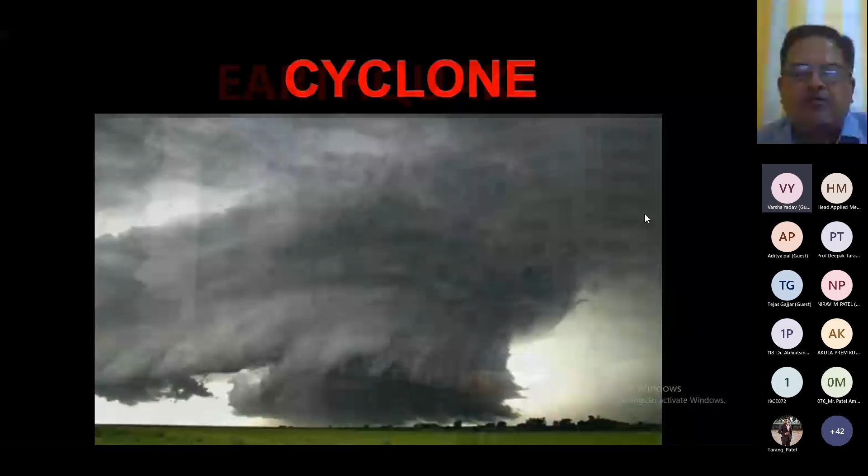And when we talk about these disasters, we are categorizing them into natural disasters or man-made disasters. Most of the time, we are saying that earthquake is a natural disaster. Cyclone, we say it's a natural disaster. When it comes to flood, we are saying that it is both ways. It is a natural disaster as well as a man-made disaster, because sometimes, because of the mistake of human beings, the area is flooded. For example, what happened in Surat was the classical case of man-made flood. Same way, Machhu Dam collapsed way back in 1979, and that was because of human error. So you can say it's a man-made disaster. So flood may be man-made, it may be natural. Same way, fire is also natural and man-made. Landslide, again, is natural and man-made.

For example, if a landslide triggers because of an earthquake, it is natural, but once you carry out mining operations in a hilly region, and if a landslide triggers because of the explosion you are doing in the hilly region, then it is a man-made landslide. Same way, you have liquefaction and the tsunami. The tsunami we generally categorize as a natural disaster.

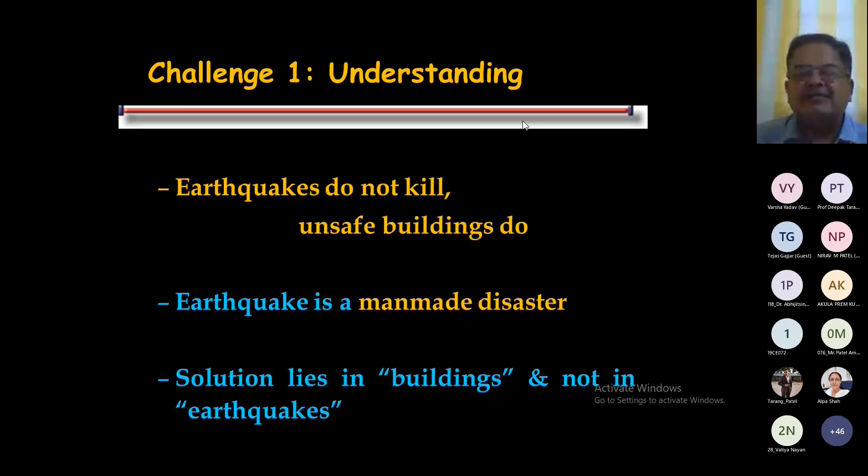So again, I'm saying earthquakes do not kill, unsafe buildings do, and therefore earthquake is considered to be a man-made disaster. Earthquake is a natural hazard, but the disaster is man-made. If you look at any particular disaster, you find two things. The loss of life: if 100 people die during disasters, out of that 47 die in earthquakes. So the highest contribution is coming from the earthquake.

Same way, if we lose 100 rupees, then out of this 35 rupees is the contribution of earthquake. The highest economic loss is also associated with the earthquake, right? So you have to be very cautious when you're dealing with earthquakes and structures. Right. So design of buildings for earthquake is a very challenging job.

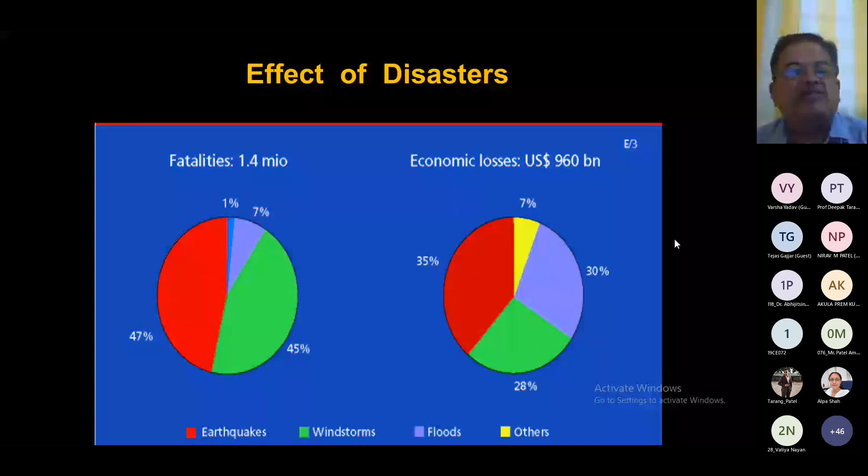And the Indo-Australian plate is going below the Eurasian plate, right? We know that on the northern boundary right now we observe the Himalaya there, but 10 crore years back there was a sea, and this sea was disappearing.

This Indo-Australian plate is moving below the Eurasian plate, so they are creating pressure on each other. When the stresses within the plate exceed the limit, the plate will break, and therefore the majority of earthquakes occur on this boundary of these two plates. If an earthquake takes place on the boundary, it is known as an interplate earthquake, and the earthquake which takes place within the plate is known as an intraplate earthquake.

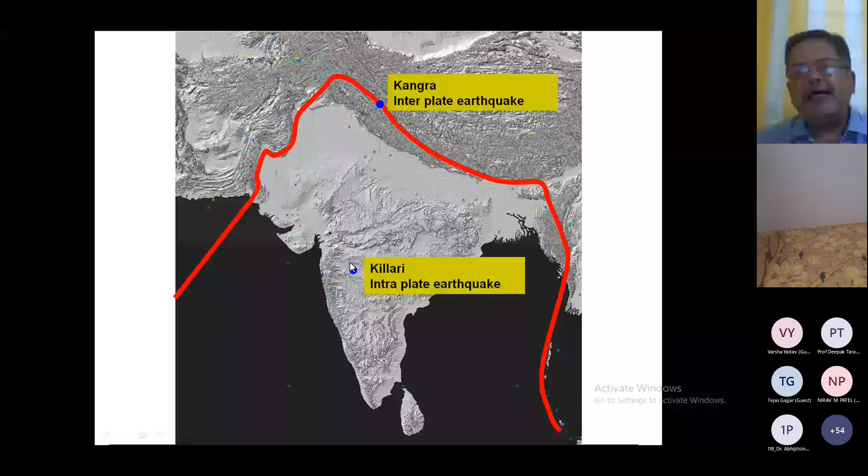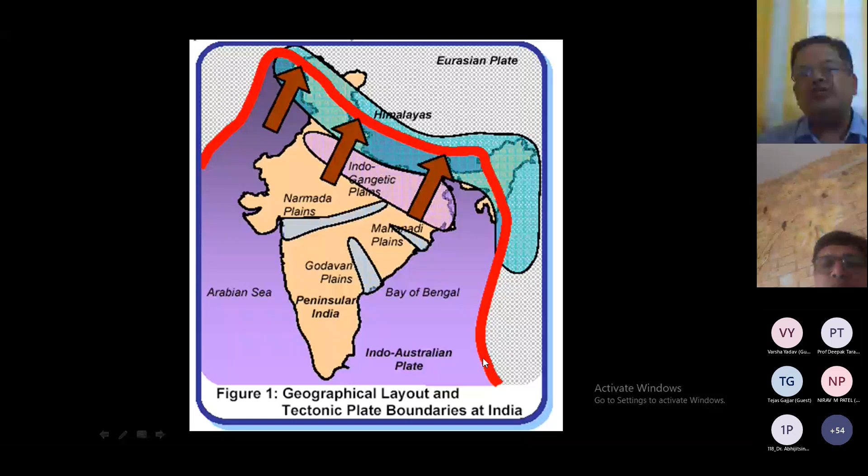Now if you look at this, we have seen this picture. This is the boundary of the Indo-Australian plate and Eurasian plate, where these two plates are interacting. The Indo-Australian plate is going below the Eurasian plate, and therefore you can see more than 95%, even 98%, of earthquakes are coming on this boundary, where these two plates are interacting.

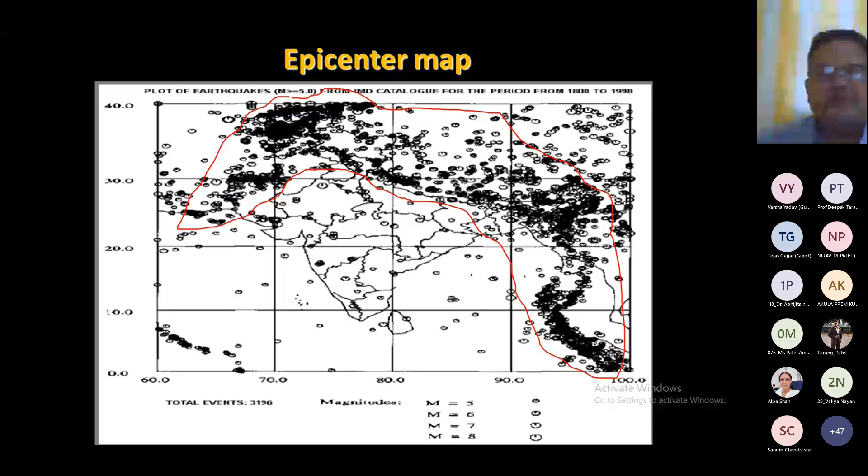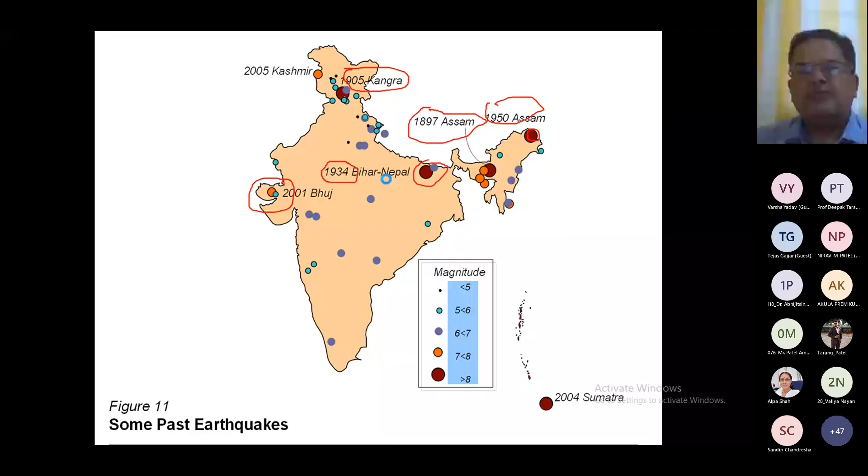And you see, this is the epicenter where the Bhuj earthquake took place. This is the place where the Bhuj earthquake took place.

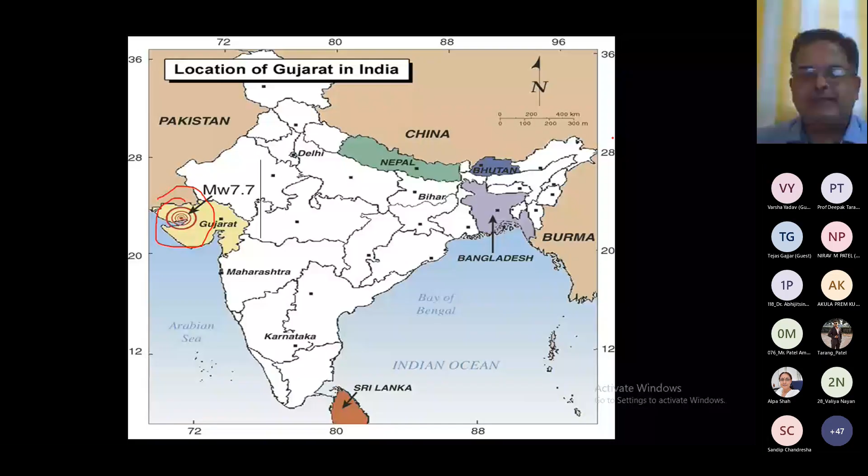Now, if you look at some past Indian earthquakes, and look at this particular list, then you find that the Kutch earthquake of 1819 had a magnitude of 8.3, and the number of deaths observed was 1500. In 1819 it was thinly populated, and even though 1500 deaths had been observed. If you look at the Assam earthquake of 1897, it is 8.7 magnitude, and 1500 deaths again observed.

If you look at the Coimbatore earthquake, 6 magnitude, but the most important thing is this number: no death had been observed during the Coimbatore earthquake. Coimbatore is in the south, it is an intraplate earthquake, and the magnitude was less, and the time of shaking was also very less.

The Kangra earthquake of 1905 had a magnitude of 8.6 and 19,000 deaths were observed. Just imagine, in 1905, Kangra is in Himachal Pradesh, and if such a big number of casualties happened during that time, it exhibits the severity of that particular earthquake.

We have the Bihar Nepal earthquake of 8.4 magnitude in 1934, with 11,000 deaths. Quetta is generally now in Pakistan, so we are not talking about it as India, but earlier in 1935 it was a part of India. That earthquake was 7.6 magnitude with 30,000 deaths, the highest reported death toll observed. And 1950 Assam, 8.7 again.

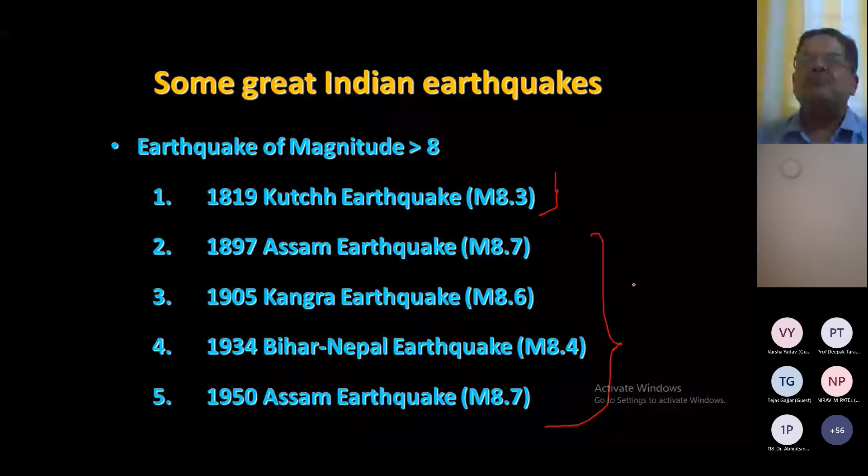Out of these, 4 earthquakes are interplate earthquakes, and one is only an intraplate earthquake. I'm talking about earthquakes that took place on the north or northeast boundary. If I'm talking about the interplate earthquakes, you will find 4 earthquakes from 1897 to 1950 - how many years is that? 53 years. India has observed 4 great earthquakes.

What is the return period? The return period is 13 years. So we can conclude that India has a probability of having big earthquakes at an interval of 13 years. You see, the whole field of earthquake engineering is based on probability.

You can see in the last 72 years, from 1950 to 2022, no great earthquake has taken place on the boundary of these 2 plates. But if India has a probability of having big earthquakes at a regular interval of 13 years in the past, then I can say that after 13 years we have a probability of having a big earthquake. If it doesn't come, then after 20 years the probability will increase.

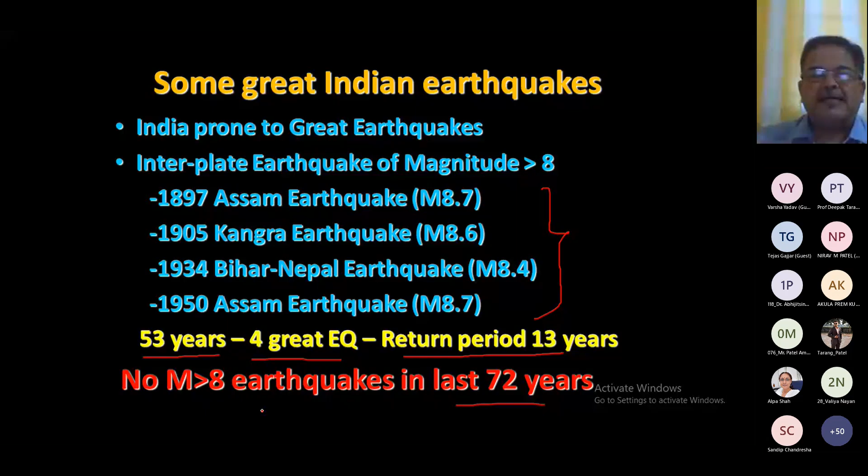Now you can see 72 years have already gone past, and we don't have a great earthquake on the boundary of these 2 plates. And therefore there is a theory of seismic gaps.

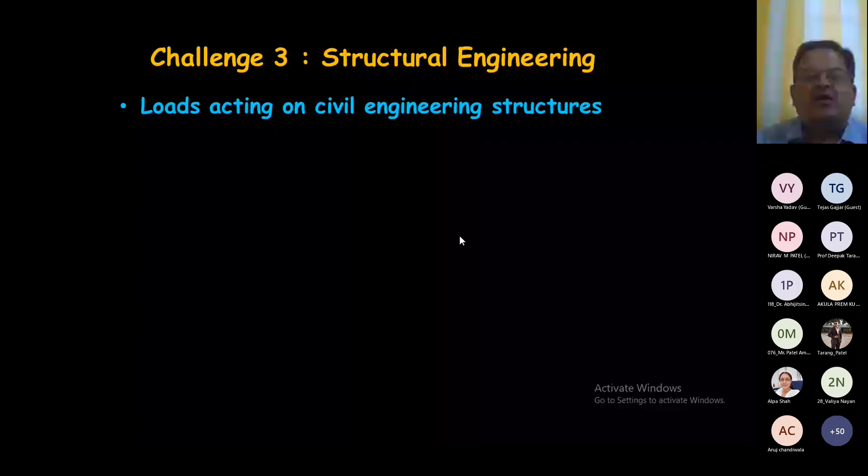When we talk about our structures, we are generally designing them for the loads acting on them. There are two types of loads: gravity loads, acting in the direction of gravity, which are dead load and live load, and loads acting in the lateral direction. I'm talking about the basic loads of concern for which we design our structures. So the dead load and live load, acting in the direction of gravity, are known as gravity loads.

Generally this load is acting on your structure, so we consider it a permanent load. If I'm designing my column for 100 kilonewton, I apply a factor of safety of 1.5 as a load factor, and design that column for 150 kilonewton. So the actual load coming on that column is 100, but we are designing for 150. It means...

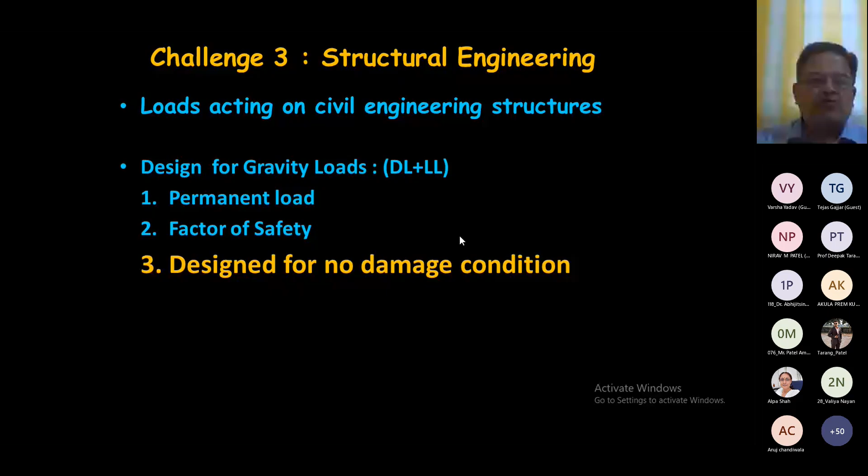Your structural element is not going to get damaged under any circumstances. So they are designed for a no-damage condition. This is very important. When you're designing your structure for gravity loads, it is designed for no damage condition. So this philosophy of designing elements for gravity loads does not allow any sort of damage because the factor of safety is involved.

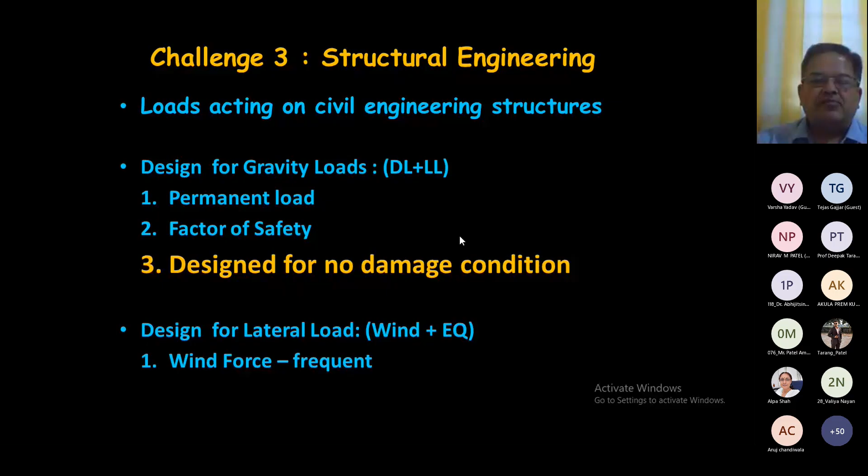When I talk about lateral loads, definitely wind and earthquake come to mind. Wind is quite frequent, and when we design our building for wind force, we apply a factor of safety, and we don't allow damage during the wind force. During a cyclone, we don't expect damage because we design our structure with a factor of safety. But when it comes to earthquake...

When it comes to earthquake, how we design is important. If you look at the earthquake event, understanding the philosophy for earthquake design is something different compared to the design philosophy for gravity loads. So we have to understand earthquake first.

Actually, what happens in an earthquake? The rock fractures, and because of this sudden fracture, energy is released, and this energy travels in the form of waves, which shake the foundation of the building. So some of this energy enters the building, and your building has to absorb this energy. If your building is able to absorb this energy, it remains safe. If it is not able to absorb the energy, the building will collapse.

If you look at how much time a structure is subjected to earthquake force, and look at the earthquake time history - acceleration versus time - the maximum effective time of earthquake shaking is 2 minutes. Within these 2 minutes, the earthquake checks all the buildings that come in its way. That is the power of nature. So within 2 minutes, the buildings will be checked to see whether they are designed properly or not.

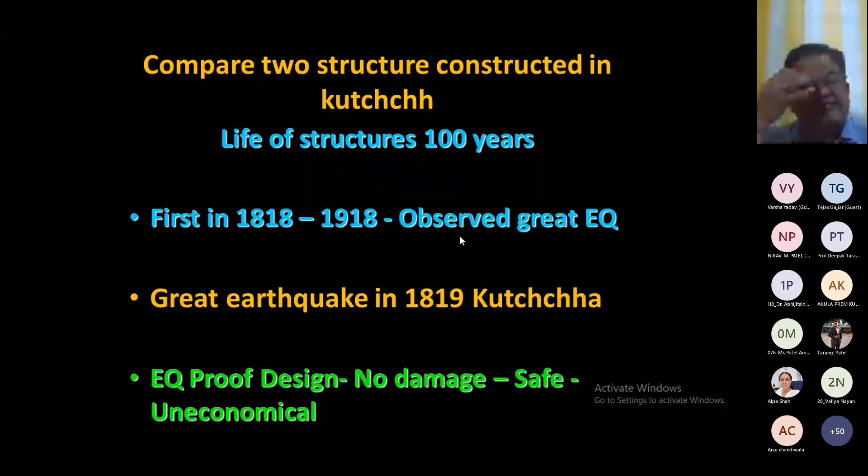The stresses must be within limit, right? Then you can say that your structure is fulfilling the requirement. So your structure should remain functional, and the stresses must remain within the limit. That is the requirement for a structure to be usable. So now I'm considering the first building, which is constructed in 1818. Now if I consider life is 100 years, it expires in 1918, right?

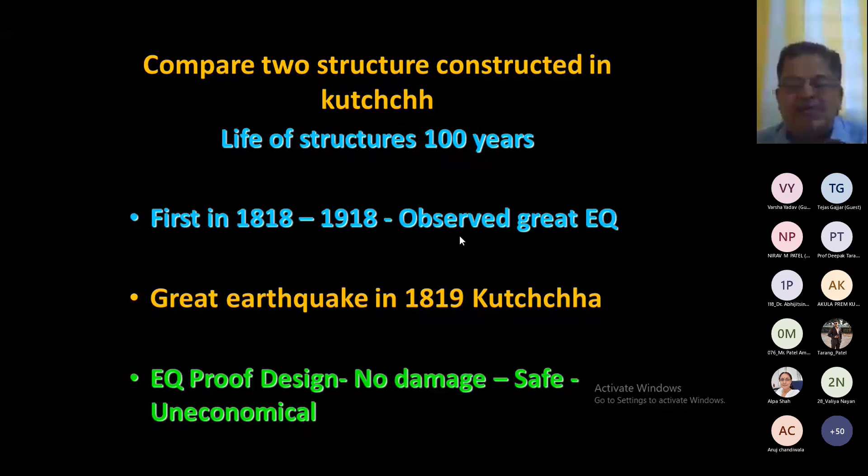Now we know that there was a great earthquake in 1819. So this building has observed a great earthquake in 1819. It was constructed in 1818, and in 1819 it observed a great earthquake. And if we learn from this building, then we understand that we have to go for earthquake proof design. We have to design in such a way that no damage should occur. So when we design the building as earthquake proof, it is always safe, but it is uneconomical, right?

Now I'm considering the second structure, which is constructed in 1820. This building will expire in 1920, right? If you look at the history of earthquakes in the Kutch region, we had a great earthquake in 1819, and then a major earthquake in 1956 in Anjar. So this building, from 1820 to 1920, has not observed any earthquake. One building has seen an earthquake after its construction. The other building has not seen any earthquake during its life.

So therefore we are saying the earthquake is not a sure event. Whether your building will see an earthquake during its life or not, it is not sure, right? And if we learn something from the second building, constructed in 1820, then this building is saying that there is no need to design for earthquake. Now you see, I told you that the whole of earthquake engineering is based on probability.

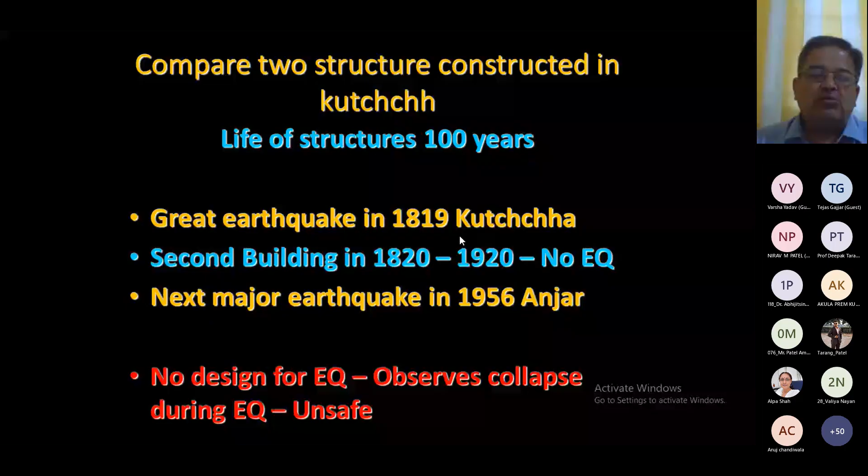Suppose the earthquake came not in 1819 but in 1850, then it might have observed collapse, right? So the building becomes unsafe. And for unsafe buildings there is no space in the field of construction. We cannot design unsafe buildings. So the first building is saying design the building as earthquake proof, and this building is saying there is no need to design the building. So two extremities, right? And therefore we can conclude that an earthquake event is not a sure event.

And therefore we are going for another approach, which is known as earthquake resistant design. Now what is earthquake resistant design? In earthquake resistant design, we are allowing the damage, but we are not allowing collapse. When I allow damage in my structure but not any sort of collapse, it is safe. Your building is not going to collapse during the earthquake. And at the same time, it is also economical, because I am designing my building for a lower level of force.

So instead of going for earthquake proof design or the no design concept, we are going for the earthquake resistant design concept. And this is the only philosophy in which damage is expected. Now I will make you understand what exactly we are doing in earthquake proof design. So here you look, this is point B.

This is the maximum force coming on your structure, right? And when I'm designing my structure for this maximum force, and this is the force versus deformation curve, it remains linear, which means it remains elastic.

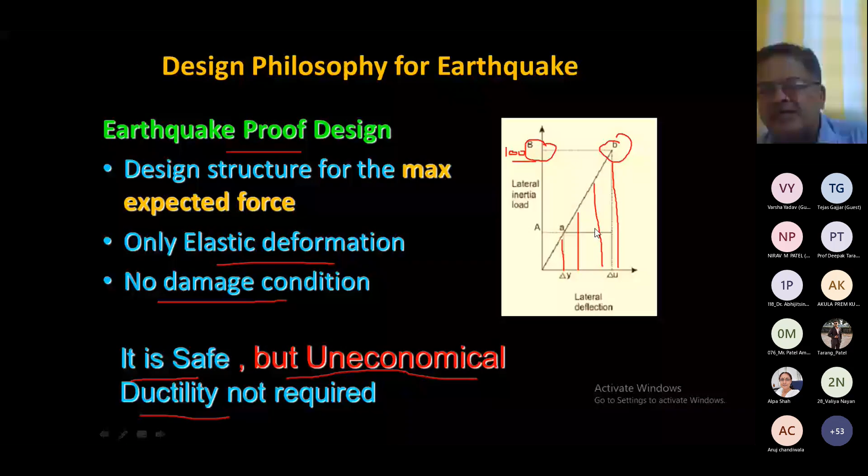In the previous case, this is a triangular portion, and this is the amount of energy absorbed by the structure. The same amount of energy is absorbed here, but here we are allowing our structure to enter into the inelastic region.

Now this is the particular point. From this point onwards, this is inelastic deformation. And what is the meaning of it? If your structure is entering into inelastic deformation, it means permanent deformation. If it is permanent deformation, there is damage. So from this point onwards, damage starts.

It means we are allowing the damage in our structure, right? We are allowing damage in the structure. And here comes the ductility part, right? Ductility part. What is the ductility? The ductility means capacity to undergo large inelastic deformation after yielding without losing strength and stiffness, right?

So here, this is basically the ductility we are talking about, right? We are saying that your structure should be ductile, right? It should be ductile, and this is the ductility we are talking about. And for this we have an IS code, IS 13920, right? So here we are allowing this inelastic deformation.

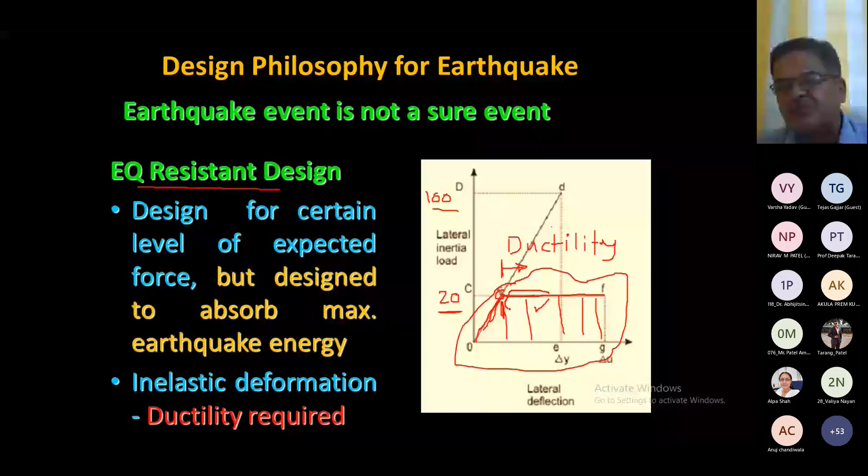Remember this inelastic deformation. So in this earthquake resistant design, we are allowing the damage. Right? So here the damage is allowed. This particular portion damage is allowed, right? But no collapse. Remember, no collapse. So it is safe, because no collapse is observed, and it is economical because instead of 100 you are designing for 20. So your structure elements are very small as compared to 100, right? So here you are designing for only 20% force.

But the only risk in earthquake resistant design is if earthquake comes, then you have to be ready for the retrofitting. So in case of a major earthquake, your building will absorb damage, and there is a possibility that retrofitting is needed after the earthquake, right? So therefore, I'm always saying that earthquake design is not a strength-based design. We are not designing for 100% strength. We are designing for 20% strength.

But the earthquake resistant design is basically based on energy absorption concept. Energy absorption, right? How much energy is absorbed by your structure? Because earthquake releases the energy, and your structure has to absorb the energy, right? Here we are allowing the damage. Remember, we are allowing the damage. We are making our structure ductile, and when we make our structure ductile, then it will absorb a lot of energy.

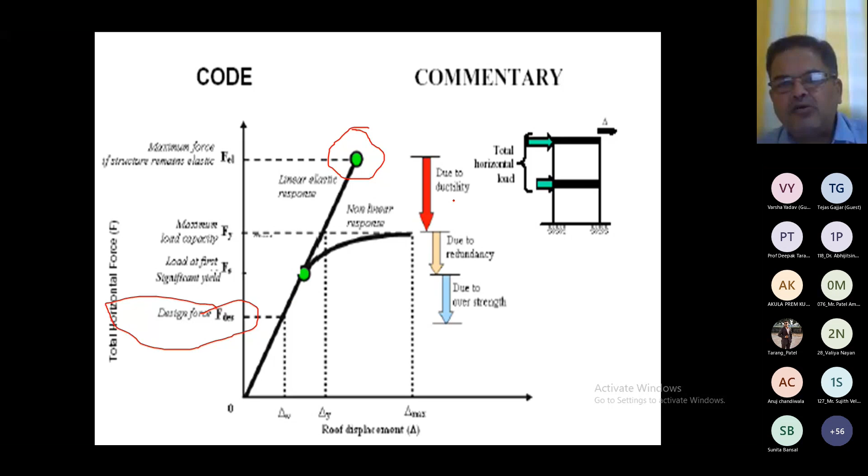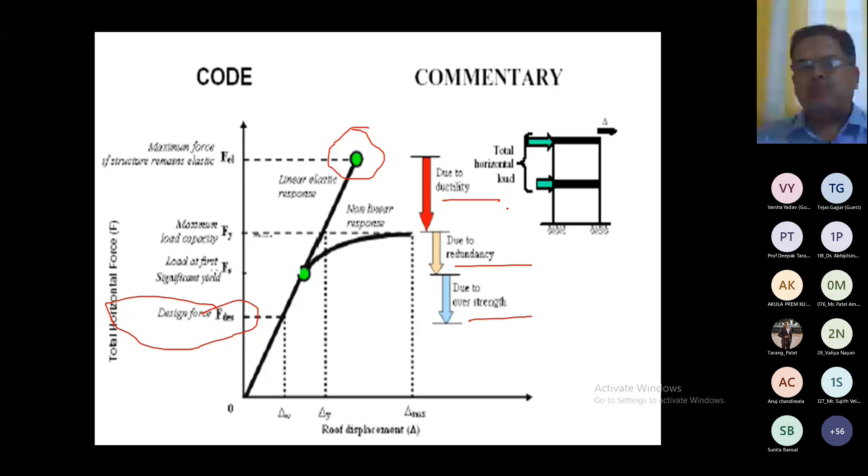Now here, this is very important. Remember this curve. So this is the maximum load which is coming on your structure because of the earthquake, and you are designing here only for this much force, right? So here, this is the design force, and you see how you are reducing. Why are you reducing this maximum load to this design load? This is because of the ductility. This is because of the redundancy and the overstrength. These are the three factors on which we are depending, and we are reducing this load from maximum load to the design load, right?

So here you can see we are designing in such a way that your structure should behave in a ductile way, and it will absorb a lot of energy. Again, I'm saying during earthquake you have to design your structure in such a way that it should absorb maximum energy, because during earthquake energy will release, and this energy is actually entering into our building, and our building has to absorb the energy to make our structure safe. So up to this particular point your behavior is elastic, and then onwards you have inelastic behavior. So that is where ductility will come in picture, right?

So if you look at this, then you find that this blue curve will tell you a ductile performance, and the brittle performance means this building collapses because it is not able to absorb the earthquake energy, right? So you have to design your building in such a way that this should not happen. Don't make your structure brittle. You have to make your structure ductile, right? That is what is required.

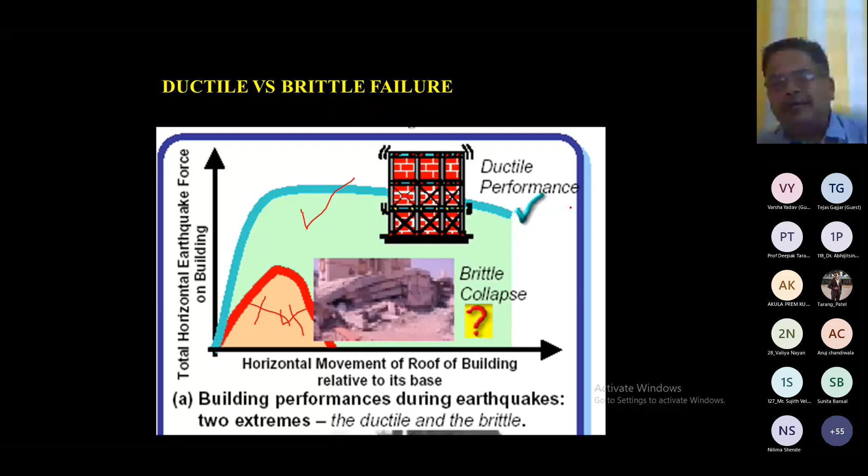So the philosophy of earthquake resistant design, I'm not going in depth as far as this philosophy is concerned, but I'm saying that damage is allowed. This is the only philosophy in which damage is allowed, but collapse is not allowed, right? Damage is allowed. So we are allowing damage. When the major earthquake comes, our structural elements will absorb the damage, and after the earthquake, we have to retrofit our structural elements and make our structure functional, right?

So again, if we compare this to earthquake proof design: earthquake proof design means we are designing our structure for the maximum expected force, and your structure should remain elastic throughout the earthquake, and if it remains elastic, then there is no damage. So it is safe, but it is uneconomical. Here ductility is not required, but you are designing for a very high level of force, and you are making your structure uneconomical, and we are not sure whether your building is going to see an earthquake or not.

In earthquake resistant design, we design for a certain level of expected force, right? And we rely on inelastic deformation where damage is allowed, right? So when you are designing for 20% force, definitely your structural element will be very small as compared to the 100 kilonewton force, right? So it is economical, and it is also safe because we are not allowing any sort of collapse.

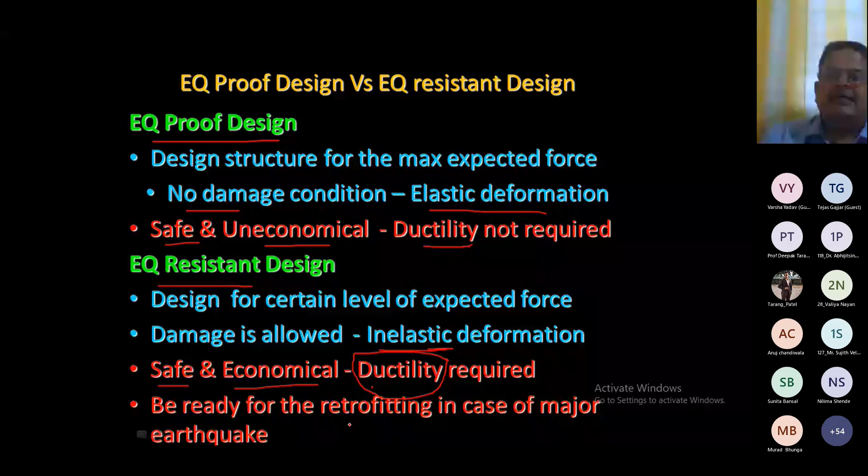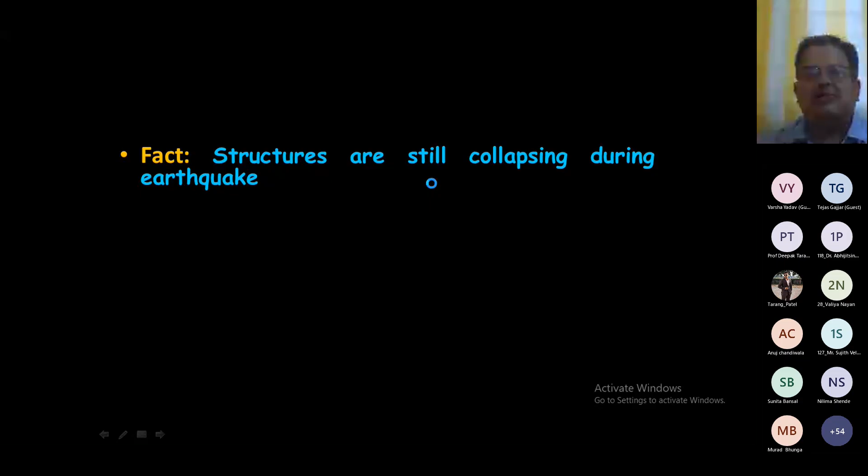Now our philosophy is saying that collapse is not allowed, right? But what is the reality? What is the fact? The fact is structures are still collapsing during earthquakes, right? If you look at the 1994 Northridge earthquake, 1995 Kobe, 1999 Turkey earthquake, or 2001 Bhuj earthquake, we have seen devastation during these earthquakes.

You see, Japan is considered to be the best as far as earthquake preparedness is concerned. And even so, in the 1995 Kobe earthquake, a number of bridges failed in Japan, right? And it exposed the wrong practice of earthquake resistant design. So even though Japan is very proactive, because Japan is sitting on the ring of fire and has observed earthquakes at regular intervals, if this is happening with Japan, then this is really alarming.

If you look at America also, in America a few buildings collapsed, not like India or Turkey; few buildings collapsed as compared to developing countries like Turkey and India, right? But structural failure had been observed during the strong motion, right? And what is happening? I told you, the loss of life.

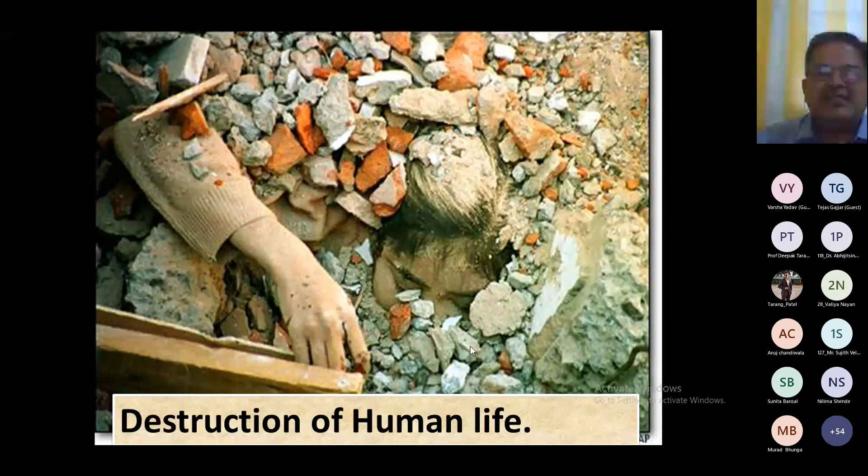Now, this kind of picture we always observe during an earthquake. If you see such pictures, then these pictures will disturb you as a civil engineer. We are not ready to accept this, right? It always questions us, who is responsible for this, right? This is the picture from the 2001 Bhuj earthquake. I want to share my experience of the 2001 Bhuj earthquake.

You see, I was working as an NCC officer, and we actually work with the Indian Armed Forces. The Indian Armed Forces was given the responsibility of rescue and relief operation after the 2001 Bhuj earthquake. So what they did, they cordoned each and every collapse site, and they were bringing the dead bodies and valuables out of that debris.

Right? And our NCC cadets were working with them, and we worked for almost 6 months, and we learned a lot. Our NCC cadets brought the dead bodies out of the collapse sites. I was also involved in bringing out the dead body of a 4-year-old boy. When we are bringing it out, it always raises the question in your mind as a civil engineer, who is responsible for this.

I want to say that after bringing that dead body of a 4-year-old boy, I was not able to sleep for a month. I tell you, right? And it always questions us: who is responsible for this, right? As civil engineers, we are not expecting this. If such a thing is happening, it means someone has committed a mistake, right? And who has committed the mistake, it is very difficult to find out, right?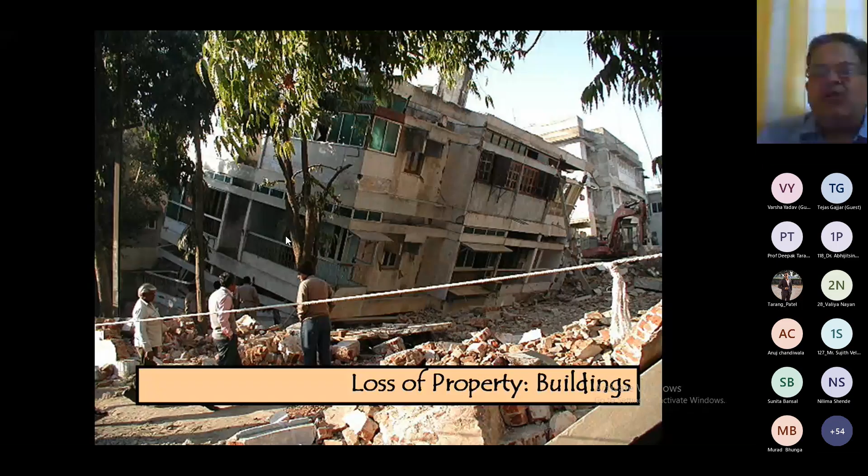So you see, as civil engineers, someone is responsible who committed a mistake, and because of that, the structure collapsed. So as civil engineers, we don't want to see such kinds of pictures. Because of this, Anjar, Bachau, Rapar, these villages or towns came to debris during the 2001 Bhuj earthquake. If you look at this, the building collapsed, right? This is a typical soft story failure. So this is actually loss of property, and maybe loss of life is also involved in such a collapse.

If you look at this, the column is almost gone. Now this column doesn't have any capacity, right? So now you have to retrofit this column. Now the most important part is that, if you look at this damage, definitely this column is not able to take any more load. And even though this structure is standing, it means the load of this column is taken by the neighboring columns, right? But after this you have to retrofit it, and again you have to make your structure functional again.

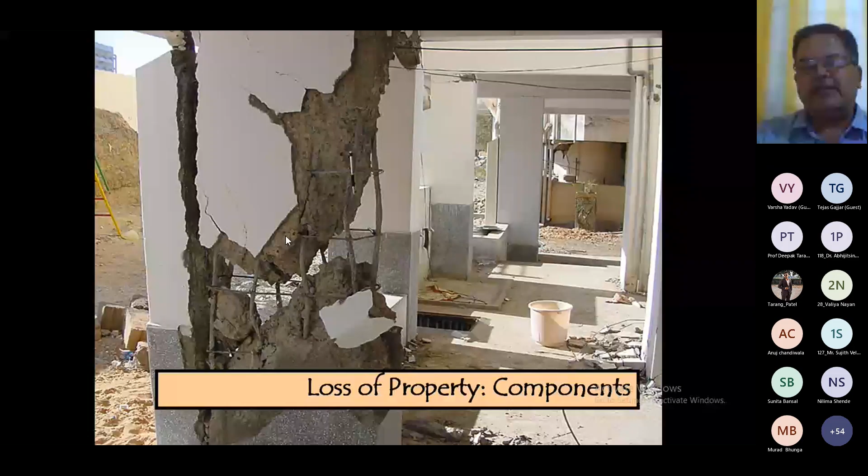If you look at the schools, 12,000 schools were either damaged or collapsed. They were made up of prefabricated elements. The joint detailing was very poor. The heritage buildings actually suffered a lot, and we know that we are not able to restore these heritage buildings, right? Because we don't have the skilled manpower. So once heritage is lost, it is lost forever because of the unavailability of skilled manpower.

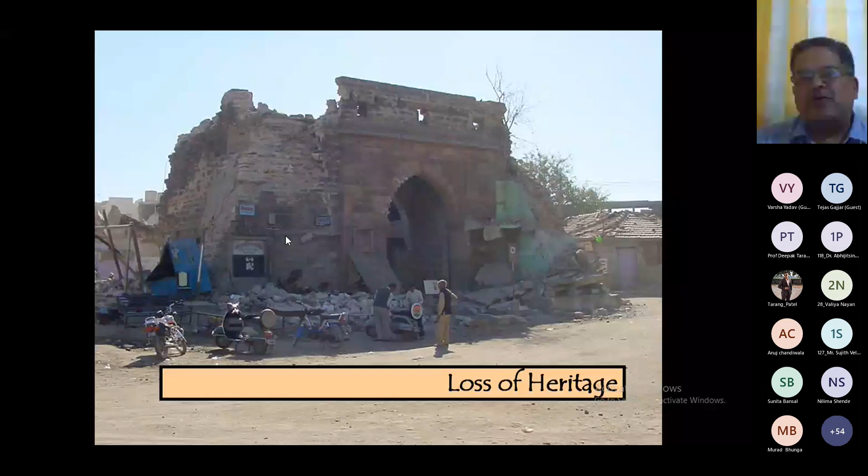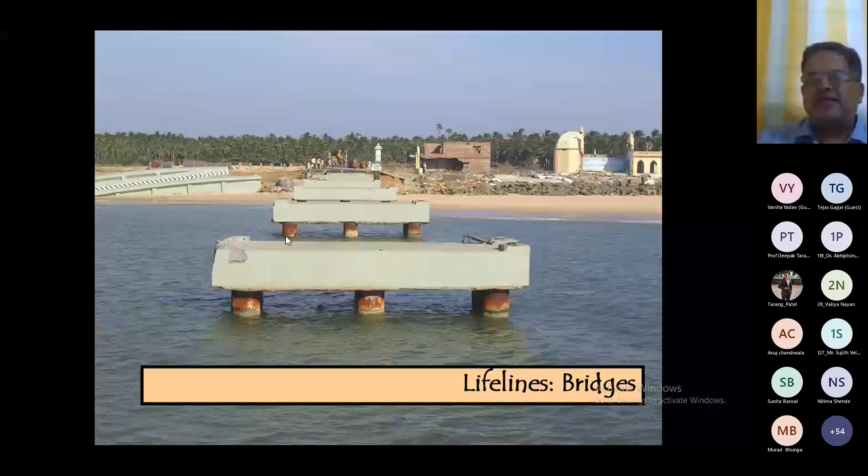This, you can see, is the Mani Mandir in Morbi. It was damaged, and after 12 years it was partially retrofitted, and people started using it again, but not 100% of the portion is utilized. This is the fort of Bhuj, damaged, and again, I'm saying it's difficult. Lifeline structures are affected a lot. The bridges were affected a lot. The road network was affected. So under these circumstances, we are not able to carry out rescue and relief operations. It is affected a lot.

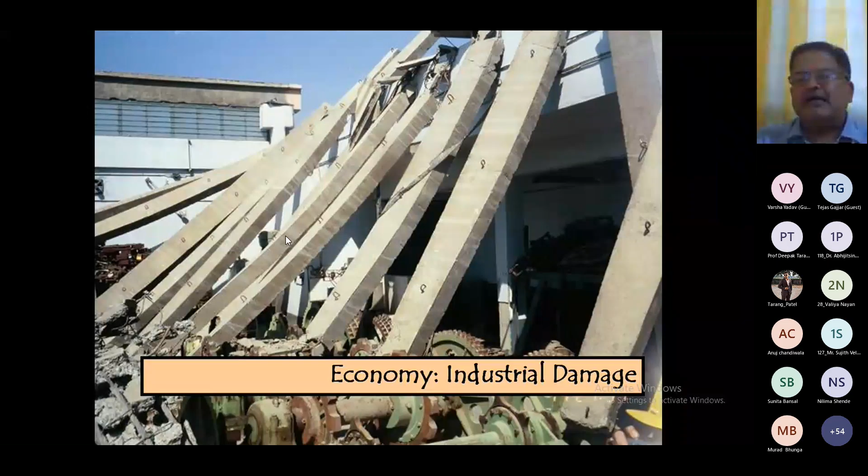The electric power was affected. Harbor structures suffered great damage during the 2001 Bhuj earthquake, and the industrial structures constructed with RC elements suffered damage. The industrial structures constructed with steel were not affected because they are very lightweight structures, but the RCC structures were affected a lot because they have larger spans and they are very massive. And the economic loss is very difficult to estimate, right? In the 2001 Bhuj earthquake, we lost almost 25,000 crore. If you consider it today, maybe it is more than 4 lakh crores or 5 lakh crores. So the economic loss is very difficult to estimate, right?

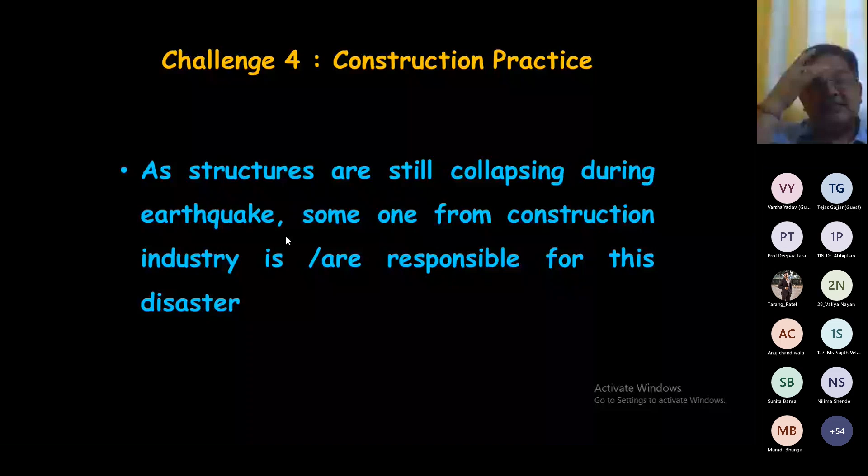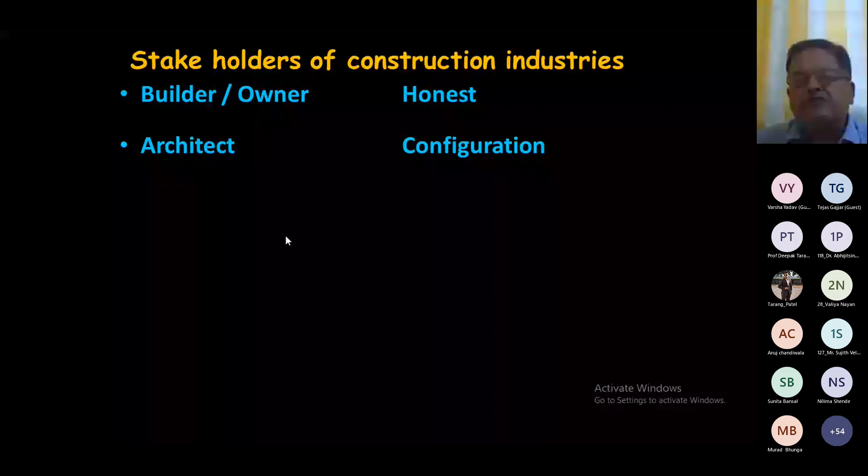So challenge number 4 is the construction practice. As the structures are still collapsing during earthquakes, someone from the construction industry is responsible for this disaster. And who are the stakeholders of the construction industry? We know the builder and owner, right? Who is conceiving the project? He must be honest. If he's not honest, then definitely we are adding unsafe structures. The architect has to give a good configuration. The structural engineer has to impart structural safety. The site engineer has to look at the quality of construction, right? The mason and carpenter have to look at the quality of construction.

The authority has to enforce the law. If we enforce the law properly, all the stakeholders of the construction industry will follow that, and definitely we have much better structures in society. Teachers and students are part of capacity building; right now this training is organized, and basically we are building capacity in the area of earthquake engineering. So these are the various stakeholders, and what attributes we want from this is marked against them.

Challenge number 5 is the error in safe construction. Generally we are committing 3 types of mistakes during construction: error of intention, error of concept, and error of execution.

What does error of intention mean? It means I know what is the wrong practice, and I don't want to go for the correct practice. I follow the wrong practice even though I know the correct practice. So that is considered under the error of intention.

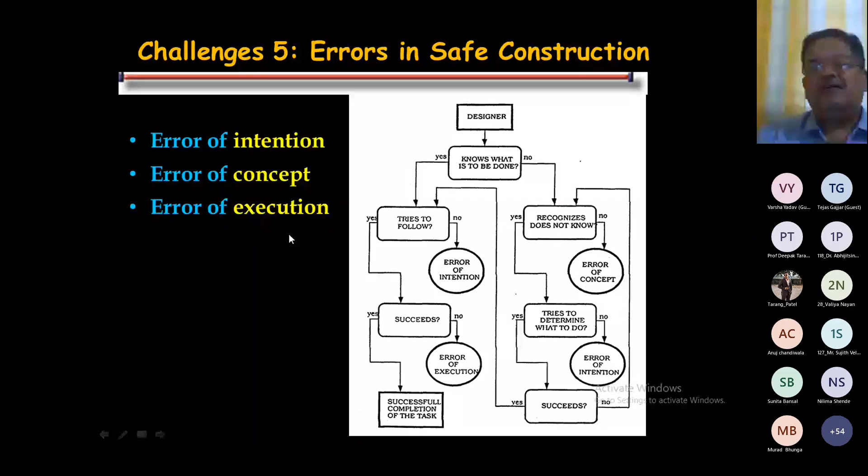Now the next challenge is change in attitude. What is the change in attitude? It's a mode of denial. Let's take the case of the 2001 Bhuj earthquake. This earthquake had magnitude 7.7. 13,805 people died, as per the official record of the government. Now if you imagine Ahmedabad, it is located almost 250 kilometers away from the epicenter.

130 multi-story buildings collapsed; most were ground plus 4-story, and two buildings were ground plus 10-story, Mansi and Sikhar. Almost 805 people were killed in 70 buildings. Out of these 130 buildings that collapsed, in 70 buildings 805 people died.

Now if you look at these buildings, you find they were very new, life less than 10 years, almost 10 years. They were designed by the architect and engineer, built by the developers. And if you look at the buildings of old Ahmedabad, like the old construction called pole, we have not seen the collapse of those old buildings.

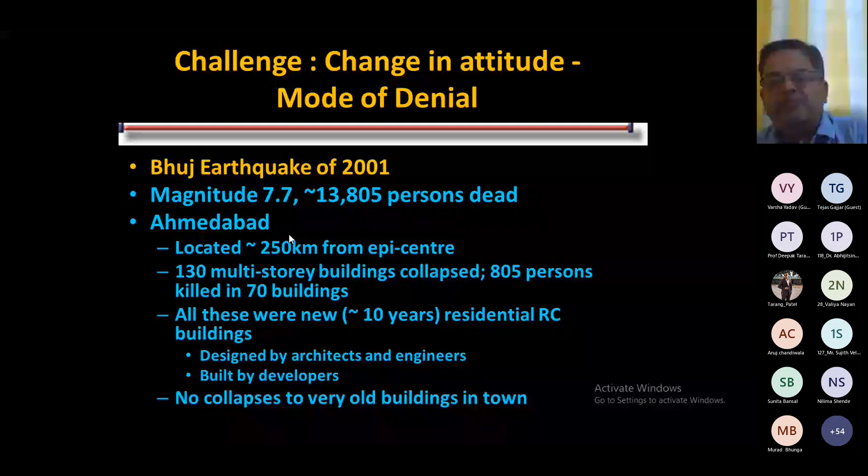Now this is the collapse of Mansi building, a ground plus 10-story building in Ahmedabad which collapsed. There are two buildings, Mansi and Sikhar, 10-story and 11-story buildings, which collapsed during the earthquake.

What was the argument of the structural engineer and builder? They are saying that this earthquake was very unusual, and that the intensity felt at Ahmedabad was more than expected.

Fortunately, we have a broadband seismometer in the passport office in Ahmedabad, and we have a record of the earthquake from it. Ahmedabad is in zone 3, and as per the Indian code, the intensity expected is 7. The maximum intensity observed during the Bhuj earthquake was 7.

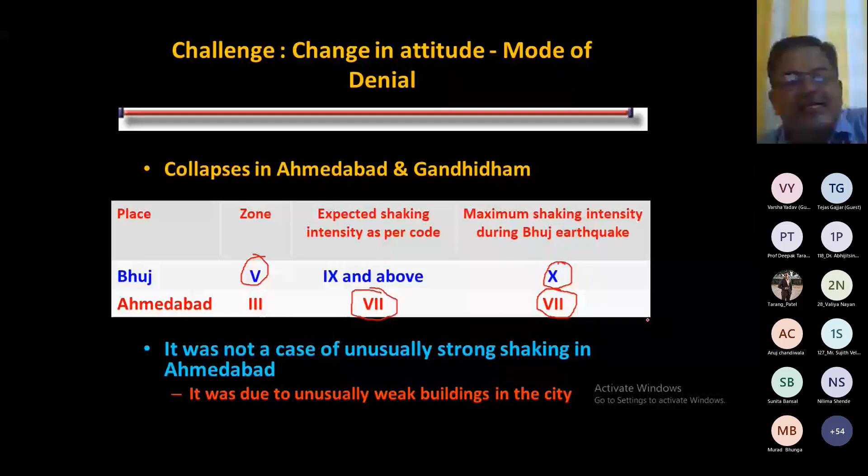So it was not an unusual strong shaking, right? Bhuj is in zone 5, so we are expecting intensity more than 9, and the intensity in Bhuj was 10. So again, it is within the limit as per the code. So we are in a mode of denial, right?

But what are the reasons why this happened in Ahmedabad? It is because of the total disregard to the structural system. The structural systems were not proper. Even if you talk about the lift, generally the lift well is constructed with RCC, but in many of these buildings we have seen the lift well constructed with masonry. I think this is a very poor practice.

The structural system is very irregular. We have a soft story, with parking at the ground story, and then we start living on the upper stories. So the ground floor becomes very soft, and almost 90% of buildings in Ahmedabad which collapsed, it is because of the soft story. We have not followed the structural design principles. The quality of construction was very poor.

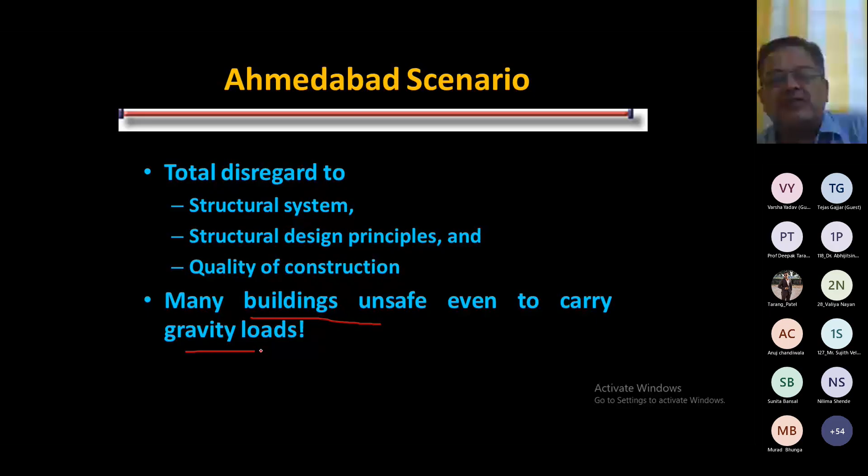There was a building in Junagadh, a 10-story building, and this building collapsed not during the earthquake - normally it collapsed under the gravity load. So you see, this type of poor quality of construction leads to big disaster.

Now the question is about developed country versus developing country. In the 2001 Bhuj earthquake, 13,805 people died. A similar earthquake took place in California, and how many deaths were observed there? Only 50 deaths in California. America is a developed country with very strict and stringent bylaws for earthquake safety, and they strictly follow that. So enforcement by the authority is really wonderful in America, but still buildings are collapsing there.

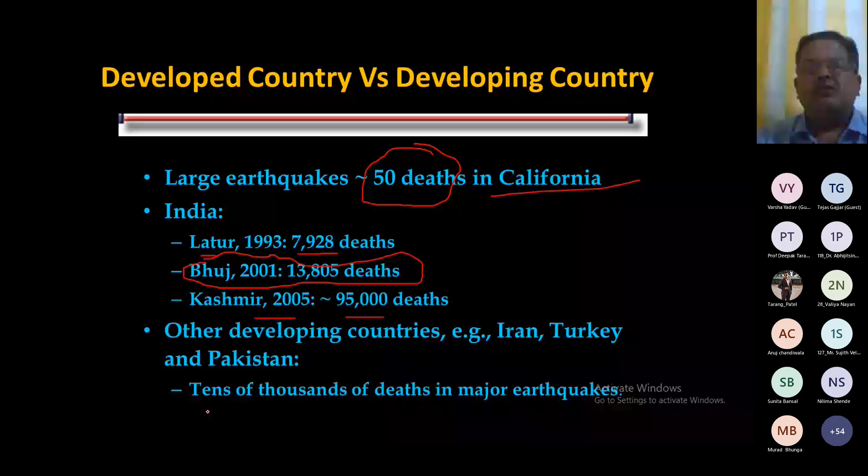If you look at India, in Latur 1993, almost 8,000 deaths were observed. In Kashmir 2005, 95,000 deaths were observed. If you talk about Iran, Turkey, or Pakistan, if an earthquake takes place, thousands of people will die. In terms of economic loss, I told you 25,000 crore, about 5 billion US dollars was the loss. If a similar earthquake to Bhuj took place in the north or northeast border, it would be even more expensive.

Now, another challenge is we are not learning from past earthquakes. We are not learning from the past earthquake. I'm just discussing a few examples of it.

If you look at the Bihar-Nepal earthquake of 1934, the magnitude was 8.4, intensity was 10 on the modified Mercalli scale, and almost more than 10,000 deaths were observed - 11,000 deaths were observed. Now, the question will arise:

was there no such big earthquake in this particular region before? The answer is no - there was a big earthquake in 1833 also, and we haven't learned from this. After almost 100 years, another big earthquake hit Bihar, Nepal, and we have seen such casualties. So we are not learning from the past earthquake. That is the problem, right? That is the problem.

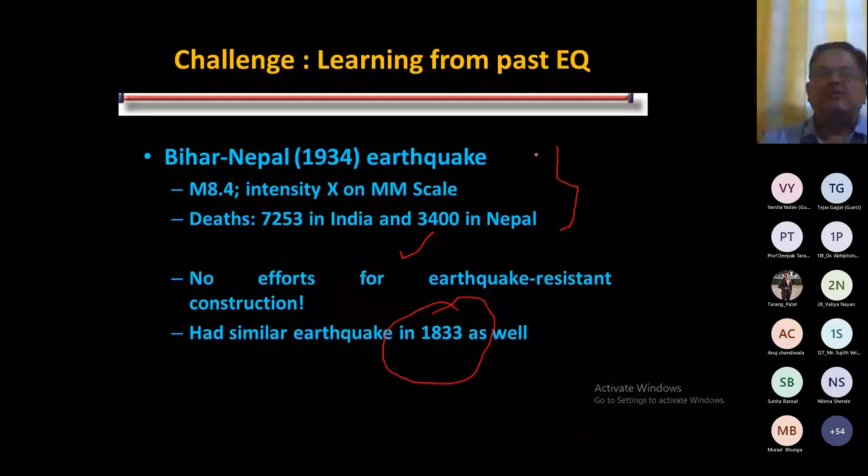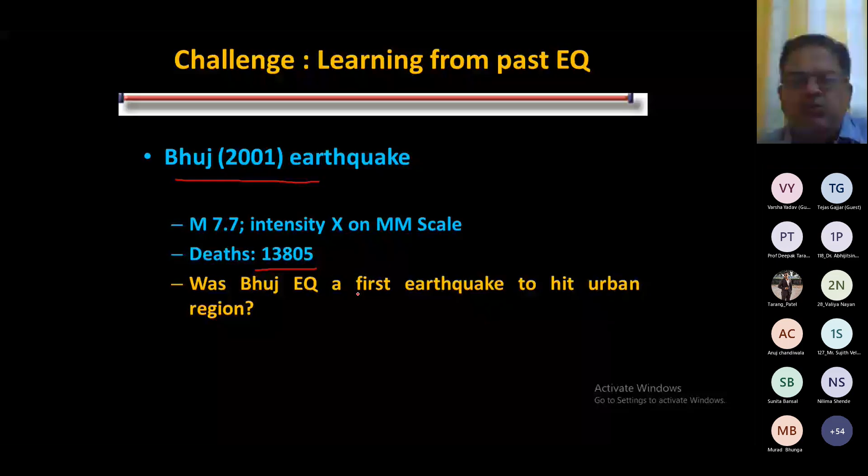Now look at the second example I'm giving you. The Bhuj earthquake, 2001, magnitude 7.7, intensity 10 on the Mercalli scale, with 13,805 deaths observed. Now the question is, was Bhuj the first earthquake to hit an urban region? No, we had an earthquake in 1997 in Jabalpur, which is a city like Ahmedabad, and the urban area was affected there too.

We have seen similar types of failures in the Jabalpur earthquake, but we have not learned from it. Why? The reason is the magnitude of that earthquake was only 6, and the number of deaths was only 38. In a country of 135 crores, only 38 people died, so we did not take it seriously. If we had learned something from the Jabalpur earthquake, we might have saved Ahmedabad, but we haven't learned from it.

Now we've been talking very negatively, you feel that, right? But there are some positive stories, success stories from India. We have seen them, but it was a long time back: 1930 in Balochistan, 1897 in Assam, and 19th century in Srinagar, Kashmir. These are the three main examples from where we can learn something.

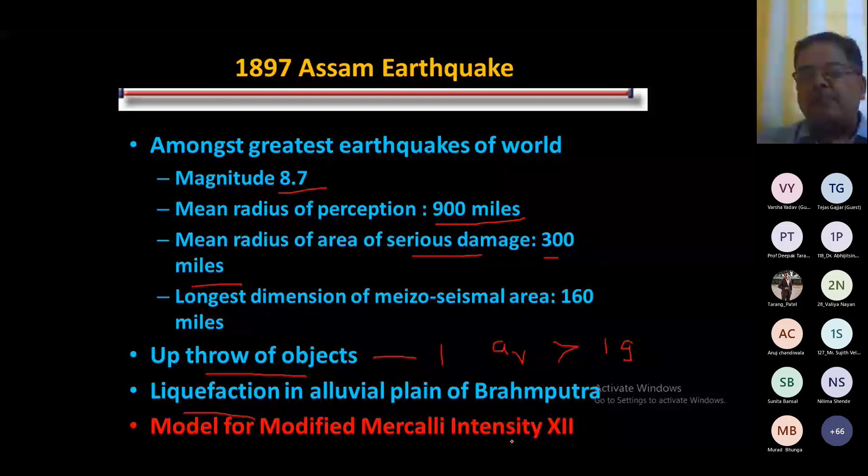Up to 1897, there were only 10 scales as far as the Mercalli scale of intensity was concerned. But after the Assam earthquake, two more scales were introduced, and now we have the modified Mercalli scale up to 12. That came after the Assam earthquake.

And after the great earthquake of 1897, the Ikra type of housing or construction developed in Sikkim. What they did was construct houses with stone and bricks up to the plinth level, and after that introduce wooden elements. This wood is very ductile in nature and also lightweight as far as mass is concerned. So this Ikra type of housing came into the picture in Sikkim after the 1897 earthquake.

But currently, again I'm saying, these houses are being replaced by poorly constructed RC and masonry buildings. If a big earthquake comes in Assam again, we'll see large casualties there.

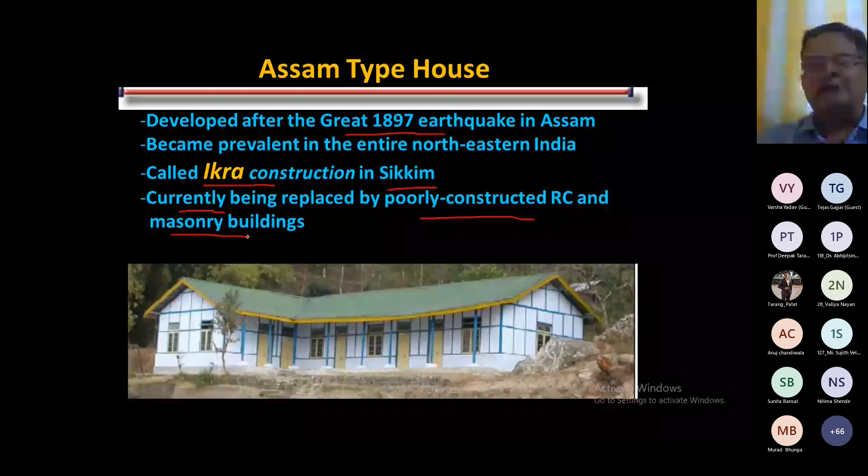The best example of a success story in India came from Balochistan. In March 1931, there was an earthquake with a magnitude of 7.4 in Balochistan. An intensity of 8 was observed, and 100 people died.

Now, this earthquake has raised a concern for safe houses for the railway officers, right? So SL Kumar, he is a very young engineer. His age was 28 years, and he was given the responsibility to design houses for the railways, and he has done a lot of work to make these railway quarters earthquake resistant.

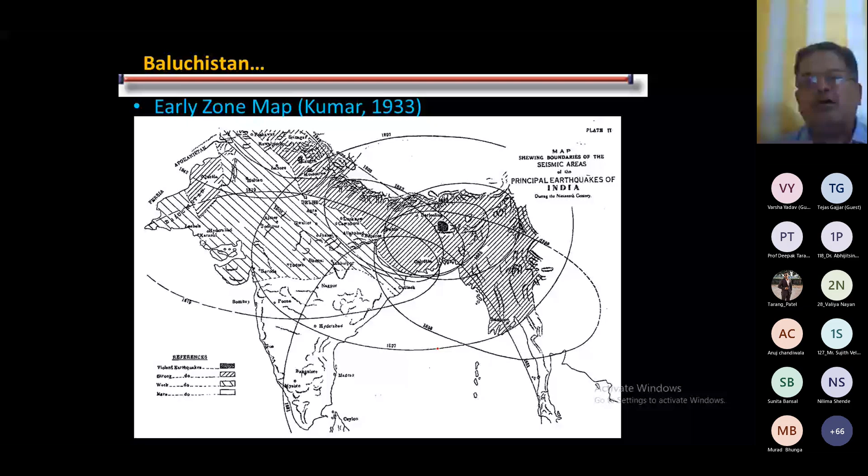Right. So in 1933, Kumar presented a paper, and he gave a concept of earthquake resistant construction, details of his design and cost implication. He gave the first ever seismic zone map of India, and he gave a seismic coefficient for two types of building, right? And this is the seismic zone map given by SL Kumar, right?

So again, I'm saying there was an earthquake in 1931. It was 7.4, and 100 people died. And after that, SL Kumar was given the responsibility to construct the railway quarters. And there was an earthquake in 1935, in Quetta. The magnitude was 7.6. Intensity observed was 10, maximum intensity. 30,000 people died, 40% of the population. Remember, 30,000 people died during the Quetta earthquake. But the railway quarters designed by SL Kumar performed excellently, right?

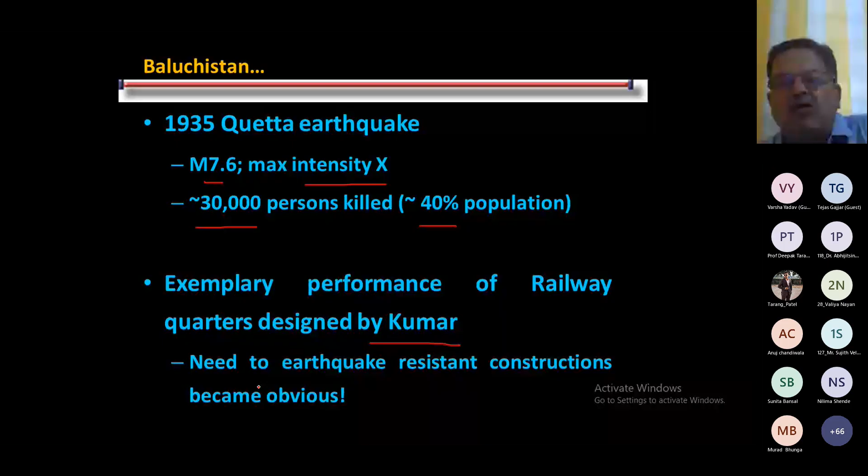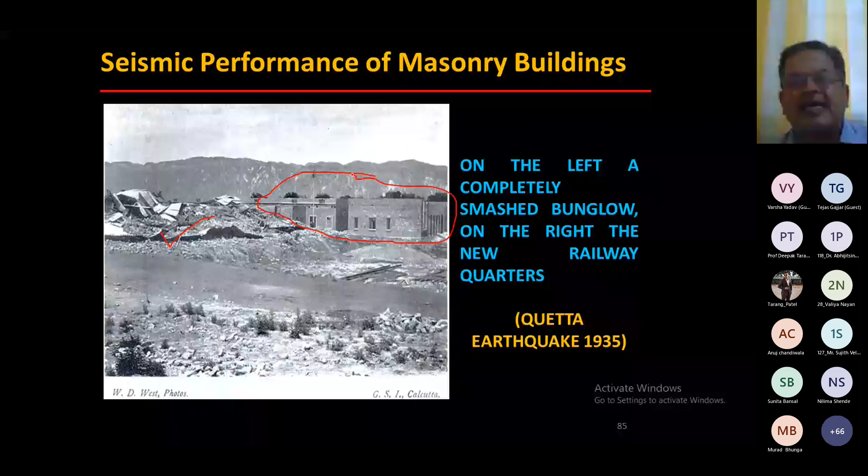And you see, SL Kumar had not learned earthquake engineering. He designed everything by understanding the structural behavior. First, look at this picture. This is the picture from Quetta. These buildings collapsed, but these buildings are absolutely safe, right? Designed by the engineer SL Kumar, right?

Now, what he has done, he has introduced reinforcement in the masonry, right? He knew that masonry is a brittle material, right? The failure of masonry structures is very brittle, and when lateral force is acting, these masonry structures are very vulnerable. So to take the tension, he introduced the reinforcement, and he created a bond. Like we have English bond and Flemish bond, he introduced a new type of bond in which he can introduce the reinforcement, and it is known as the Quetta bond.

You see, SL Kumar had not learned any earthquake engineering, but he designed this building on his knowledge only, right? And these structures performed excellently well during the earthquake of 1935, right? So it gives us the idea that if you do anything honestly and for the society, you can do wonders, right?

So we know that some fantastic work was done from 1897 to 1935, right? New typologies of buildings were introduced: the Quetta bond, Assam type housing, the Dhajji Dewari. But after 1935, there were many earthquakes, but we have not done anything. If you look right now, we are more vulnerable than 50 years ago, right? And another important thing is the developments in 1897 and 1935 were led by professionals, not by academicians, right? Academics should lead this. Instead, the professionals were leading at that particular moment.

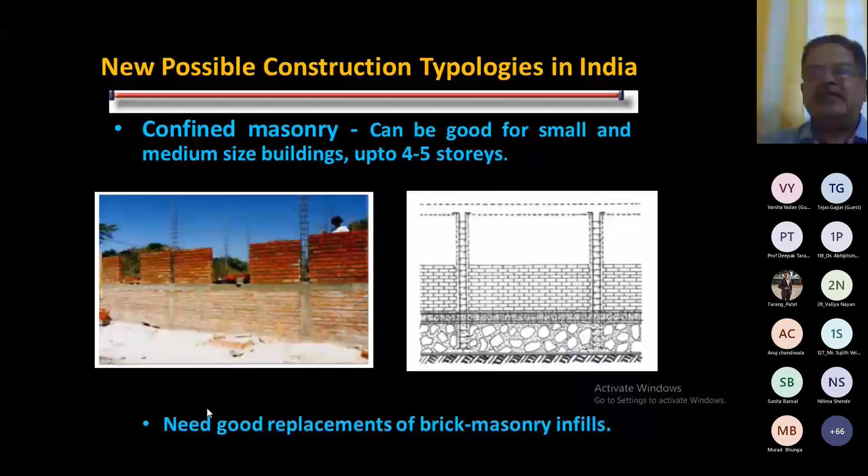So there is a new possible construction typology in India, confined masonry, for which we are conducting this course, and we will learn many things as far as confined masonry is concerned. Another challenge is the content of the code, right? We have IS 875, right? There are 5 parts. The first is dead load, then superimposed load, wind load, fourth is snow load, and the fifth is load combination.

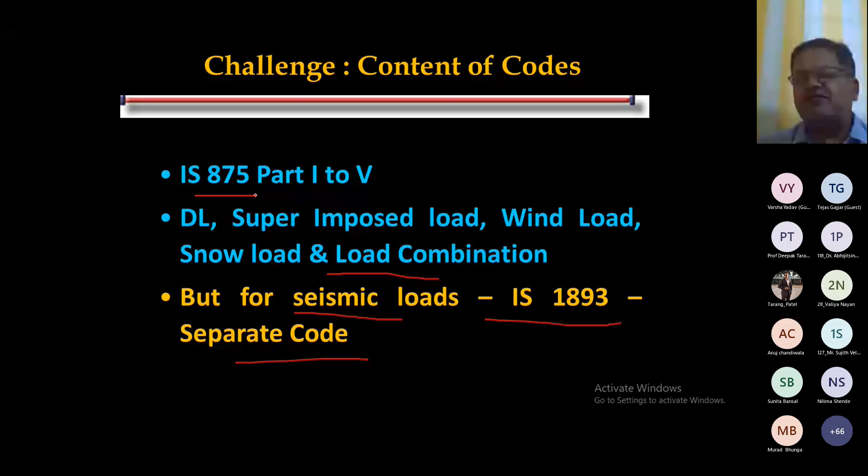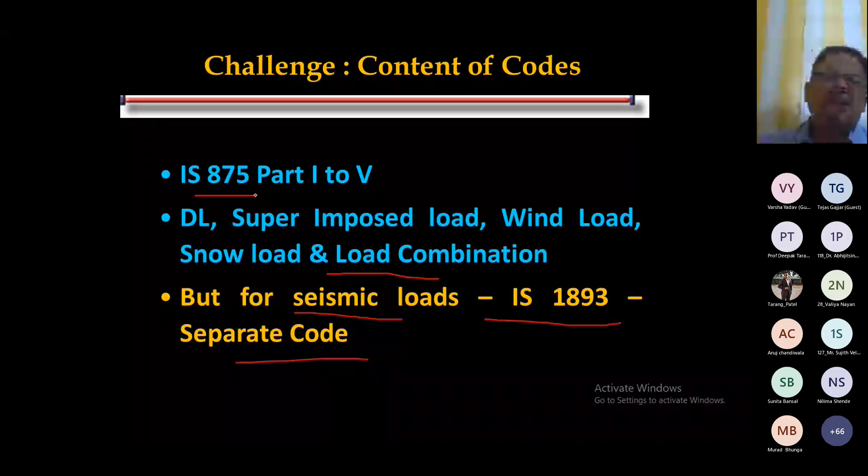But as far as seismic load is concerned, we have a separate code, IS 1893. It must be included in IS 875 itself, because earthquake is a similar type of load, right? And this load you have to consider. People knew 875, but people did not know IS 1893 before 2001 in Gujarat. We asked many people; they did not even know 1893. So this is something unusual. So IS 1893 should be a part of IS 875. There should be 6 parts: first dead load, second superimposed, third wind, fourth earthquake, fifth snow, and then load combination. It must be included there only.

The second challenge was the regularity in development of the code, right? IS 1893 is the code for earthquake resistant design. It was developed in 1962, right? And then it was revised in 66, then 70, after 4 years, then 5 years. After 75, it was again revised in 1984 after 10 years, and then 1984 to 2002, right? After 20 years, and now it is in 2016.

So after 14 years. So this revision should be regular at an interval of 3, 4, 5 years, right? Now, if you look at the biggest revision we made in 2002, look at how this code came into the picture. There was an earthquake in Latur in 1993, so the revision of IS 1893 was started, and it was revised in 2002, after the 2001 Bhuj earthquake. So you understand, we need one earthquake to start the revision, and another earthquake to complete it, right?

So this should not happen. The code must be revised at an interval of 4 or 5 years, right? We don't want landscape changes in the code. We have to include the latest practice in the code. That is required. So we are not doing it at a regular interval, and you see, very few people are contributing to the development of this code. So many professionals, many academicians should contribute to the development of the code, right?

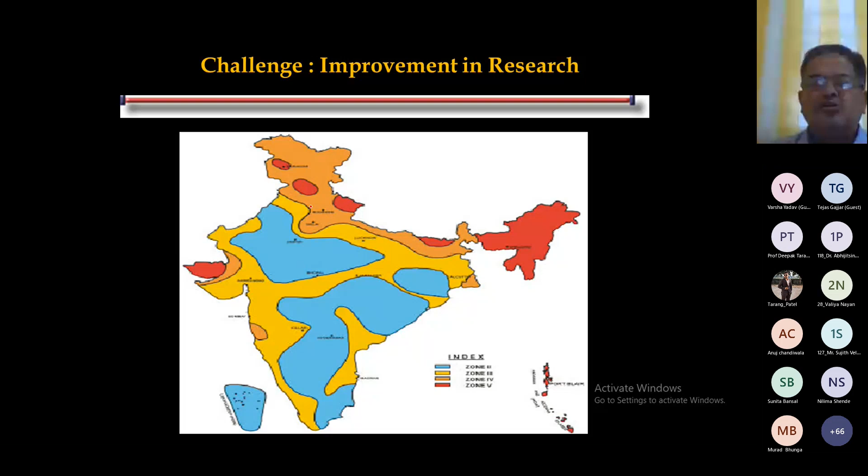For example, the ISR, Institute of Seismological Research, is doing microzonation of Gujarat. They have completed microzonation of the Kutch region. They have done it in Gandhinagar, in Ahmedabad, and many other parts of Gujarat. It is a scientific basis for seismic zoning in India. But if you look at the other parts of this map, there is no scientific research. At a few places it is taken up, but not at most places. So it should be based on good scientific research.

I'll tell you another way. Suppose you are going for plan passing. The plan is prepared by the architect. He submits the plan to the authority, and the authority checks whether it is as per the GDCR or not, and they look at the FSI. Suppose we have a 1,000 square yard plot and FSI is 1; if the construction is 1,000 square yards, they approve it. Once the plan is approved, it goes to the structural engineer, who will design and submit the design and drawings to the authority.

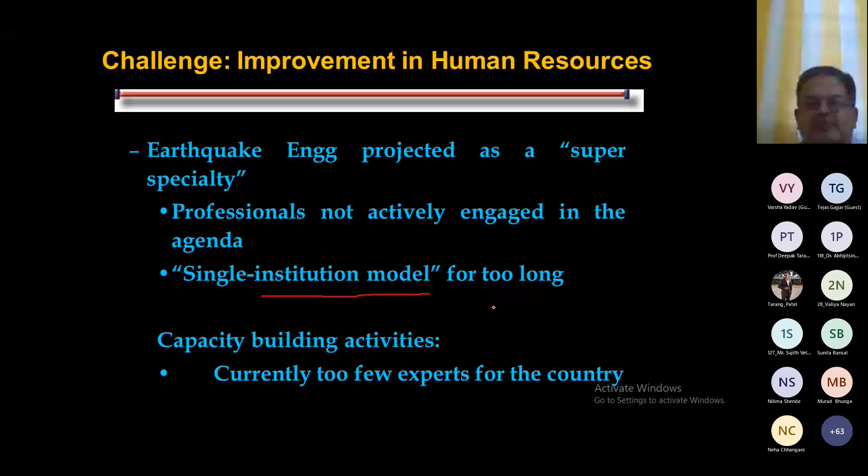Earthquake engineering is always projected as a super specialty. Now it should not be, right? Professionals are not actively engaged in the agenda, and the single institution model has lasted for too long. For example, IIT Roorkee was dominating for so many years, and they are talking about earthquake safety. But you see, if you want to make the whole of India earthquake safe, then the single institution model will not work, and we have to train everyone from the construction industry.

We must have a good enforcement framework for code compliance, right? So we must have certain incentives and, at the same time, certain punishment. For example, if we are not wearing a helmet on a two-wheeler, we are punished. If we are not wearing the seat belt in cars, definitely we are punished, right? So such kind of incentive and punishment should be there for wrong design or correct design.

There must be legal clarity on code enforcement. Another important thing is licensing of structural engineers. This is very important, right? How do we allow a civil engineer to design the structure? It is not based on the knowledge, it is based on his or her experience, right? If someone is graduating, he must have the correct knowledge, right? Only then should he design.

The municipal authorities have to ensure compliance at the time of building permit and occupancy. That is required. So municipal engineers have to ensure the drawings comply, and develop a system for on-site inspections. The structural engineering profession is to be regulated through the engineers bill. This is very important, and we don't have the engineers bill.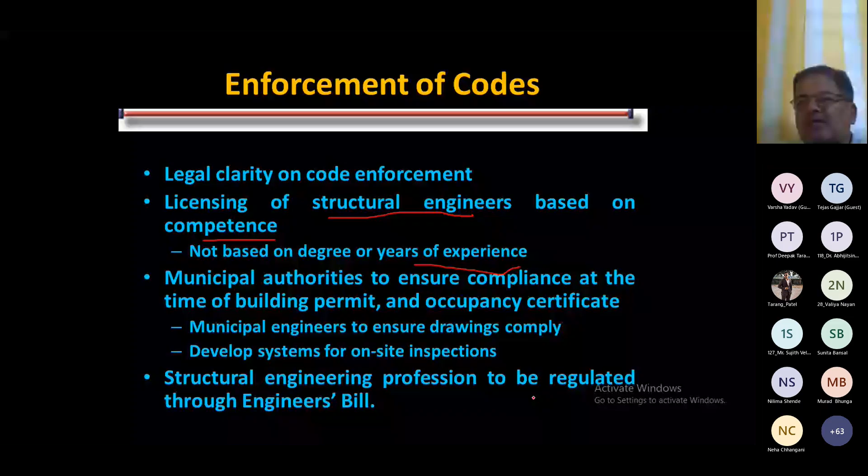On-site, we know that the role of the mason is very important, right? Masonry work for earthquake resistance is something different, and if the mason is not doing good masonry work, then we are allowing trouble. So certification of masons or bar benders is required. We did it for 3-4 years, but after that we stopped again, because we forgot the 2001 earthquake.

I told you competence-based licensing of engineers is required. The Gujarat Council for Professional Civil Engineers act was passed in 2006, and now in 2022 they have implemented it, making it compulsory for all engineers to clear the exam to practice. General civil engineers who want to practice have to pass the exam conducted by the Gujarat Council for Professional Civil Engineers. If they want to work as structural engineers, there is a separate exam they have to appear in. That is required.

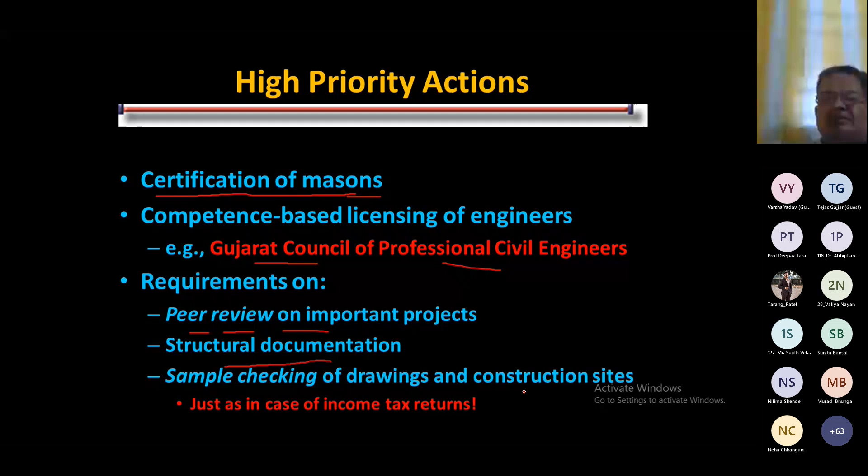What other things are required? Peer review on important projects. Right now, government projects always go for peer review. Structural documentation is necessary, right? And sample checking of drawings and construction, just like the case of income tax returns.

If you look at the major earthquakes, they give us a window of opportunity to go for changes in the construction field and for capacity building. But this window is very short and often wasted. In 2001 the earthquake came in Gujarat. We were very serious from 2001 to 2009 or 2010, and after that everything was diluted again. Earthquake engineering was introduced as a compulsory subject in 2003, and in 2016 it was made elective.

Before 2001, this subject was not taught at the undergraduate level, and when a high committee found out the reasons for the devastation, one of them was that this subject was not taught at the undergraduate level. That was a major reason for the devastation. Then the subject was introduced, and in 2016 people started forgetting the earthquake again and removed it.

I think the people from universities, the professors and academicians, removed the subject and placed it as an elective. Right now 10 to 12,000 civil engineers graduate every year, and out of them only 500 or 600 students take this particular subject. So we are not serious about it. So we must have a roadmap.

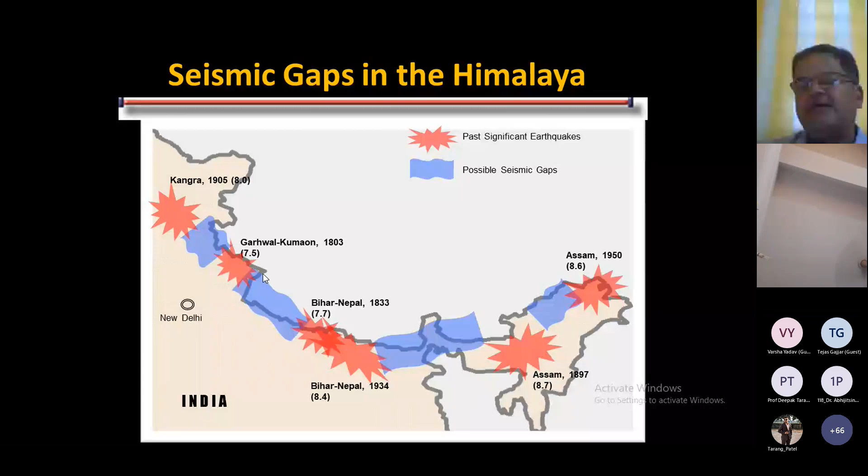We have discussed the theory of seismic gaps, and this blue region is the potential region where a big earthquake may come, and we have to be ready for that. We know that earthquakes are occurring at a regular interval, and a mega earthquake disaster awaits India, particularly in the north or northeast boundary, the Indo-Gangetic plains. So we know that this is very important.

Most of the construction is generally deficient in this particular region. Therefore we have to work a lot, and we know that the solution lies in the building, not in the earthquake. So an urgent intervention of the building industry is required. I told you, earthquake safety is a long and hard struggle. You will not get an instant result.

Unlike the CNG campaign. I had given you the example that California started its earthquake safety program 70 years back, and it is still going on. India has not started yet, so how much time we need, we cannot say right now.

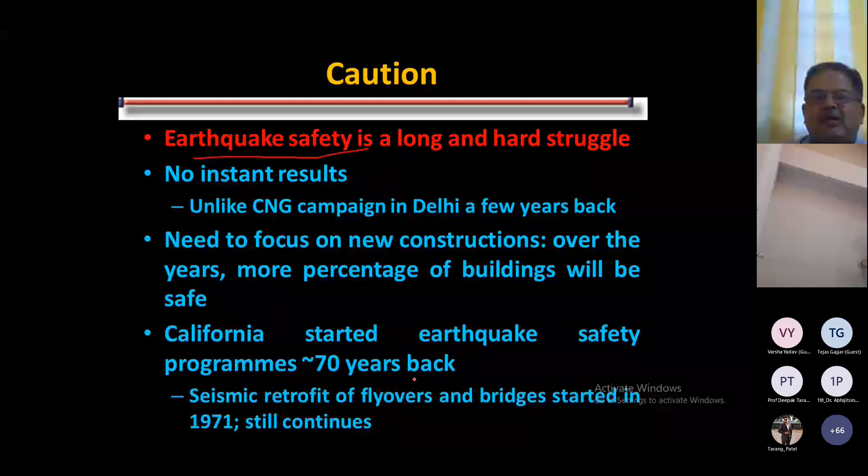Certain initiatives were taken in Gujarat after the 2001 earthquake. In the civil engineering curricula, the earthquake subject was introduced, but it was removed in 2016. Training of engineering teachers took place. Training of practicing engineers and government engineers took place. Awareness regarding buildings took place. Mason training and certification was started. Seismic microzonation had been done.

Seismic codes were developed by IIT Kanpur and GSDMA. Two good organizations came up in Gujarat: the Gujarat State Disaster Management Authority and the Institute of Seismological Research. And the most important thing is the Gujarat Council for Professional Civil Engineers was formed, and the Gujarat Professional Civil Engineers Act came in 2006, but it was not implemented up to 2021. It is now implemented in 2022.

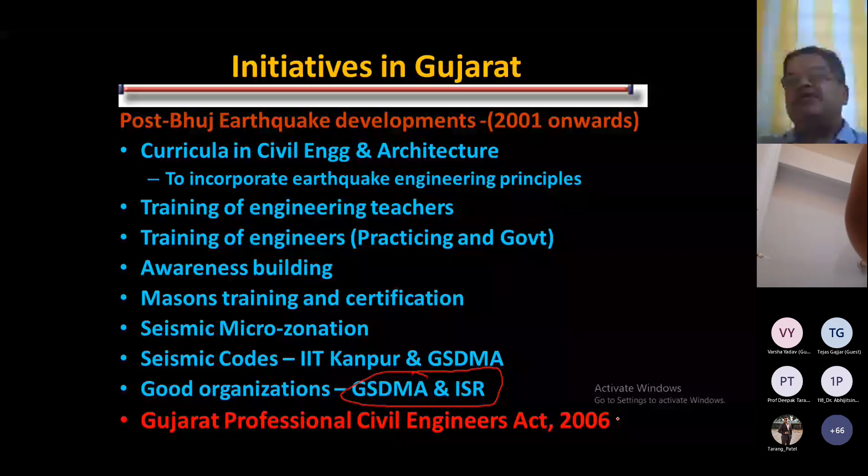Now this council has become very active, and they have started taking the examination, and now the certification will be based on knowledge, not on experience. So what is remaining as far as initiatives are concerned? We know that GSDMA and ISR came into the picture, but no technical institution came up to deal with the problem of unsafe construction. So that is the problem.

So the roadmap to seismic safety is basically community awareness. We have to spread awareness among the people of exactly what they have to see when they purchase houses. Right now, suppose I am purchasing my house, I am not looking at the structural safety. I am looking at the aesthetics of that building and the cost. These two parts I am observing, and that's enough for me.

But we have to create awareness. We have to create a legal framework. We have to create technical competence, professional ambience, enforcement by the local authority, and research and development. So we have to focus on these areas. This is the roadmap to seismic safety.

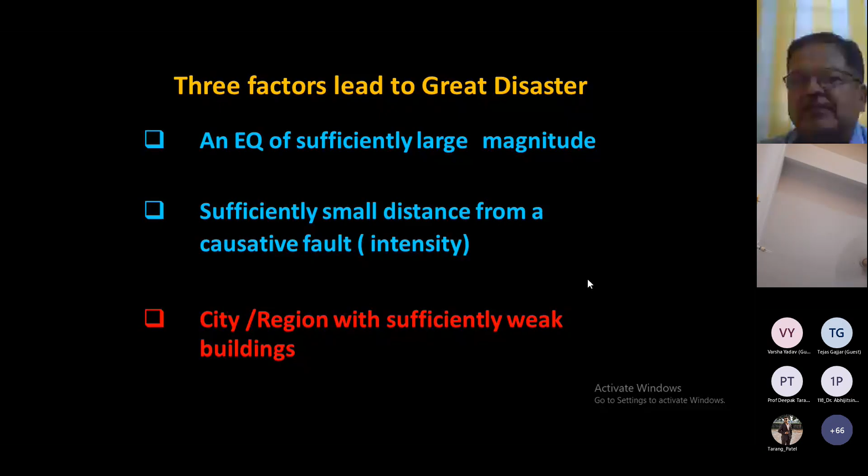There are three factors which lead to a great disaster: an earthquake of sufficiently large magnitude, sufficiently small distance from the fault, and a city or region with sufficiently weak buildings. I'm talking about the Great Tangshan earthquake of 1976. The magnitude was 7.8. 243,000 people died out of 10 lakh. What is the reason? The fault was passing through the city.

We have a fault below Chandigarh city, but it is not active. So we are lucky that it is not active. But this fault in Tangshan was active, and 25% of people died. 25%, which is remarkable. Buildings were not designed to resist earthquakes. This was the 7.8 magnitude Tangshan earthquake.

But if you look at the city of Agadir, Morocco, this city was struck by an earthquake of only 5.7, and 10,000 people died out of 30,000. One third of the population is gone. What is the reason? The buildings were weak and brittle. Now, a great disaster doesn't require a large city. Imagine if this happened in Mumbai, what would happen?

So, what can we do? We cannot predict an earthquake or stop an earthquake event from happening, but we can prevent the collapse of structures by adopting good technology and good practice. This is in our hands.

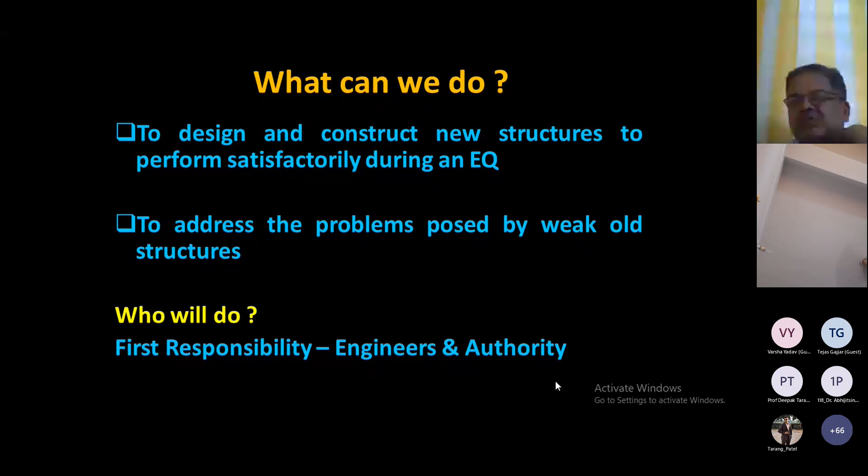What can we do? We design and construct new structures to perform satisfactorily during the earthquake. We can address the problem raised by weak old structures. And who can do that? The engineers and authorities; they are primarily responsible for this. Factors for good seismic performance: we have not discussed the technical part right now.

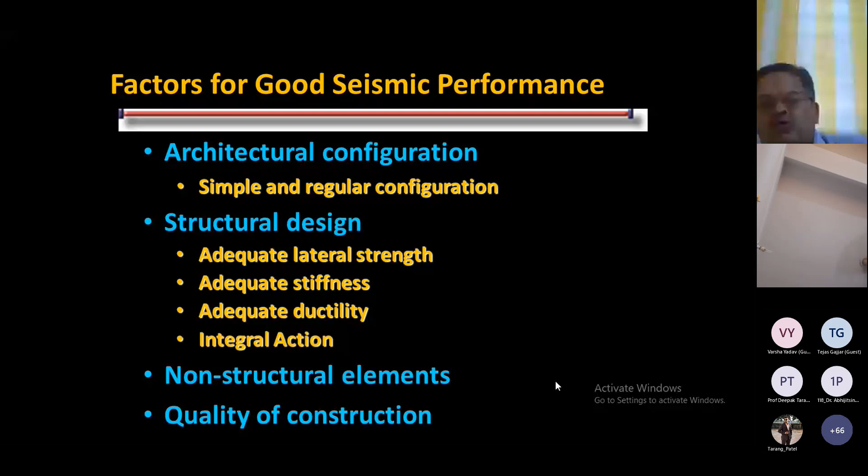So basically the configuration, lateral stiffness, ductility, integral action, quality of construction. This is required, right? We'll discuss this part later.

So we are always saying that seismic design is a shared architectural and engineering responsibility. If the architect and engineer are working separately, then for the case of earthquake they are inviting disaster, right? If they work separately for the gravity load, that is fine. But if they work separately for earthquake effects, then they are inviting trouble, they are inviting disaster.

So architects and structural engineers need to work together, and good interaction is required between the architect and the structural engineer, which is very important, which is missing right now. I tell you, in India, the interaction between the architect and structural engineer and civil engineer is missing. And this is the example of the teamwork. If architect and engineer are not working together for earthquake, this is going to happen. Everything will be messed up at the end.

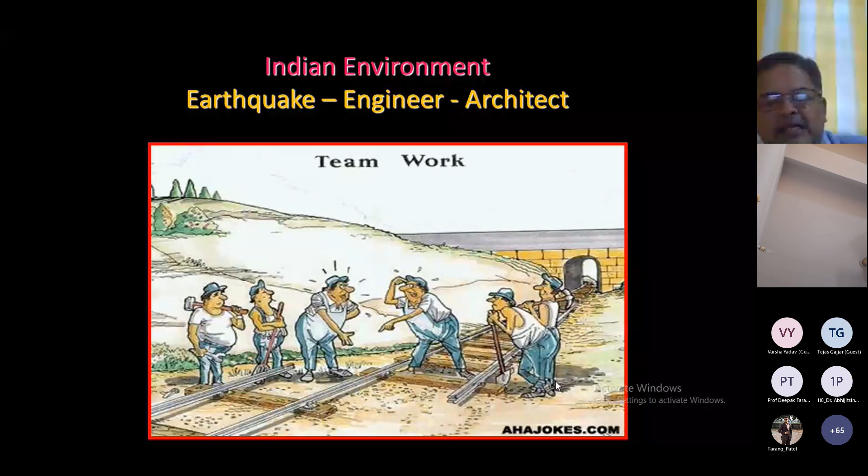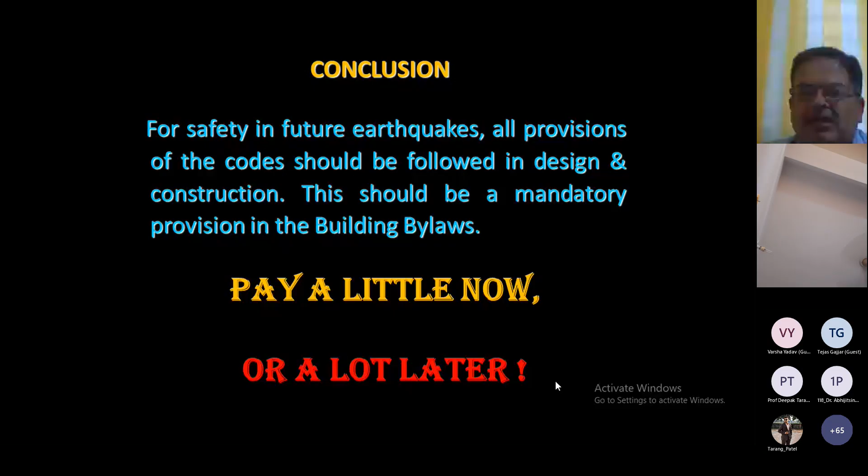So what is the conclusion for safety in future earthquakes? Simple. All provisions of the code should be followed in design and construction, and this should be a mandatory provision in the building bylaws. That's all. We have to follow the codes. This is the only requirement. And we are always saying: pay a little now. We have to pay a little attention now, otherwise we are going to pay a lot later.

Your time has already started, and we have to begin with the end in mind, because we know that the journey for earthquake safety is a very long journey, and we have to work hard. We don't know how much time we need. So let us prepare ourselves to reduce earthquakes to a nuisance rather than a danger, and convert the earthquake disaster into a routine event. That is required.

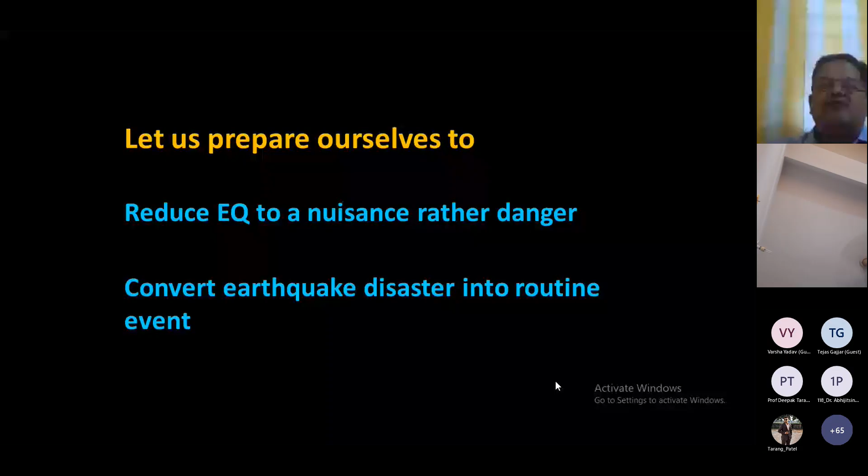I tell you, I had the same experience after the 2001 earthquake. I was teaching this subject before 2001, but I became very serious after 2001. Right.

If you are just reading the reports, it will not give that impact. But if you have seen that casualty, you are never going to forget it. I still remember the dead body of that 4-year-old boy.